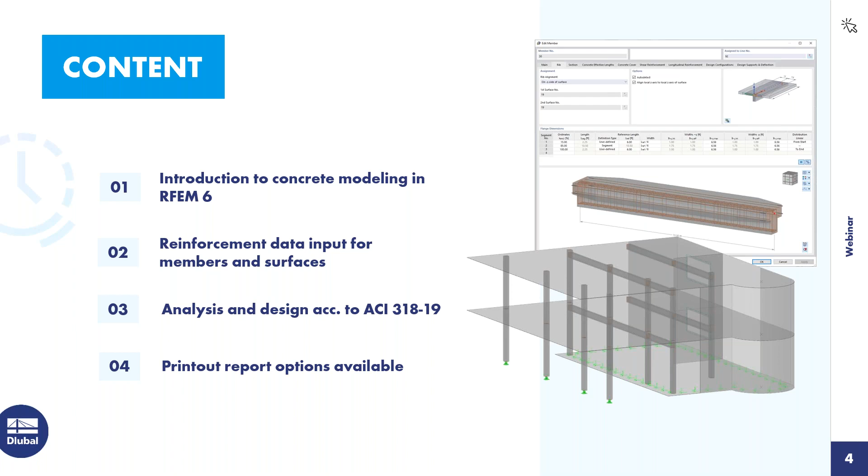As far as the content over the next hour today, we're going to move through a couple of examples, and we'll be working in our new FEA program, RFEM 6, as well as utilizing the concrete design add-on. So I'll give you a quick introduction to concrete modeling within our program. We'll take a look at reinforcement data input for both members and surfaces. We will be running an analysis and of course design according to the ACI 318. And finally, at the end, I'll show you a few printout report options that are available within the new program.

So we'll actually begin immediately within RFEM with our first example. So when we begin a new file, we want to give it a model name. The type of model is set to 3D. On the second tab, you'll notice here are all of our add-ons. So these add-ons would only be available if you've purchased them. And today we'll be focusing on the concrete design. You can see I've activated it here.

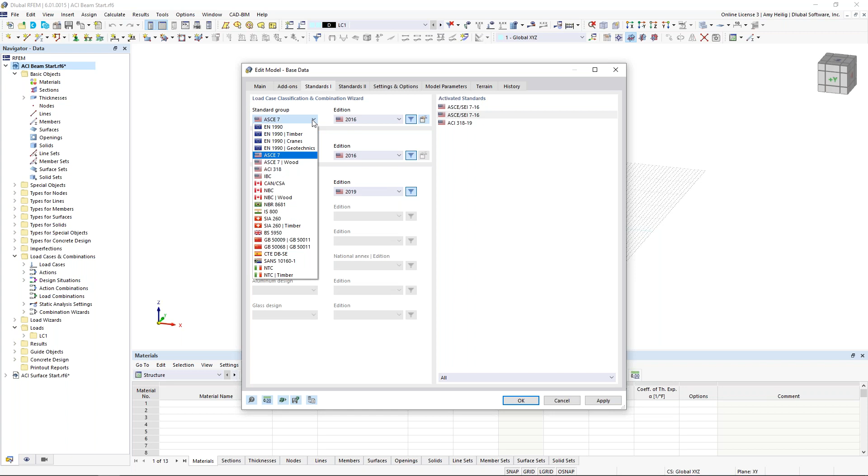Under the third tab, standards, this is where we can select the relevant concrete standard since we've activated that add-on. Today we'll be working with the ACI 318, but you can see here the Canadian standard, the Eurocode, and other international standards are available. As far as our load cases and combinations, we'll be working with the ASCE 7, but of course we can use our drop-down to select a different standard there. And finally, under the settings and options, this is where I can orient my global and local axes. You can see I've set both of these Z axes to upward for the model here.

So once we are done defining this basic information, we are brought into the main program RFEM here. And we want to start off with our drawing grid, which we can right click at the grid down at the bottom to edit this. You can see that I have my grid point spacing set at 1 foot. If you have anything else here, you can either reset it or you can choose this option here, default. That will move it back to 1 foot on spacing.

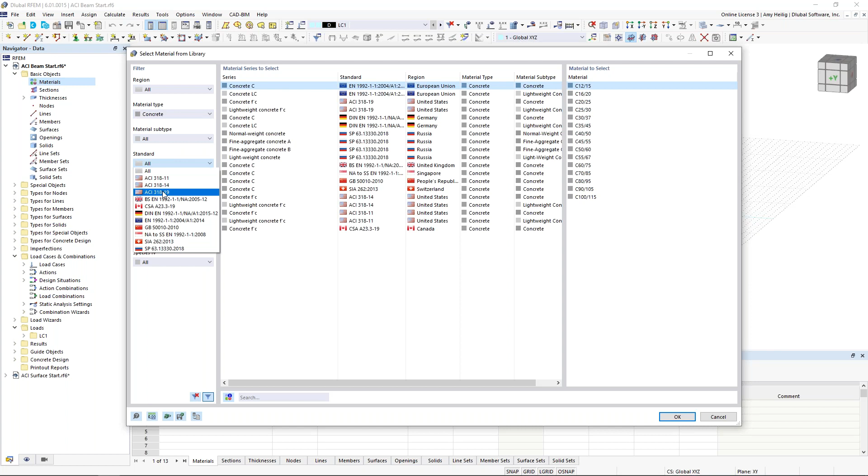We want to begin by defining a new material here. So we will right click within our navigator under the material to create a new material. This will bring open our dialog box within the program. We can then access our material database and we'll take advantage of the filters over here on the left. So you can see within my drop down, I can choose concrete, I can select the standard ACI 318-2019, and from here I can choose my 4000 PSI concrete.

Notice on the second tab here with this concrete material, we also have the settings for creep and shrinkage. This comes into play a little bit later on with the serviceability design for long-term deflection if we wanted to consider that. We'll go ahead and leave this unchecked for our example today.

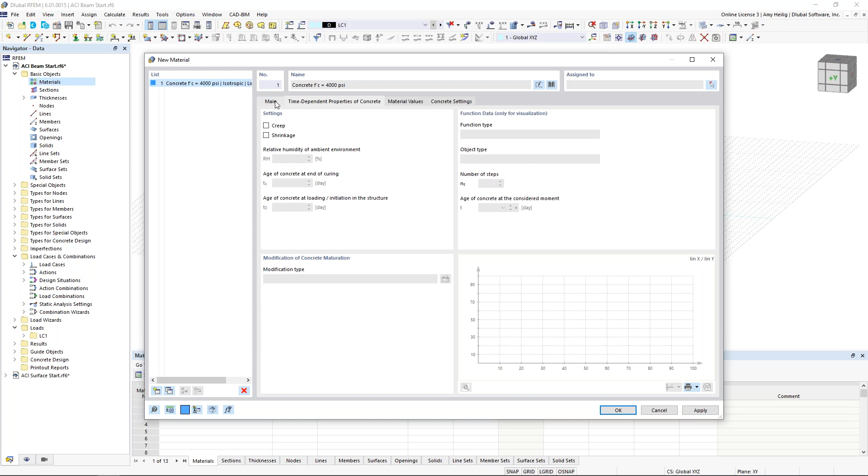Now, while we're still in this dialog box, we want to create a second material. So we once again visit our material database, and over on the left, we use our filters to reinforcing steel. Again, selecting the ACI 318, we can now choose grade 60. So this is a little bit different in RFEM 6 than what we saw previously in RFEM 5, where we do want to go ahead and define that reinforcing material here for our concrete elements. Once those materials are defined, we'll see them over here within the navigator tree. Now we want to do the same thing for our first cross section.

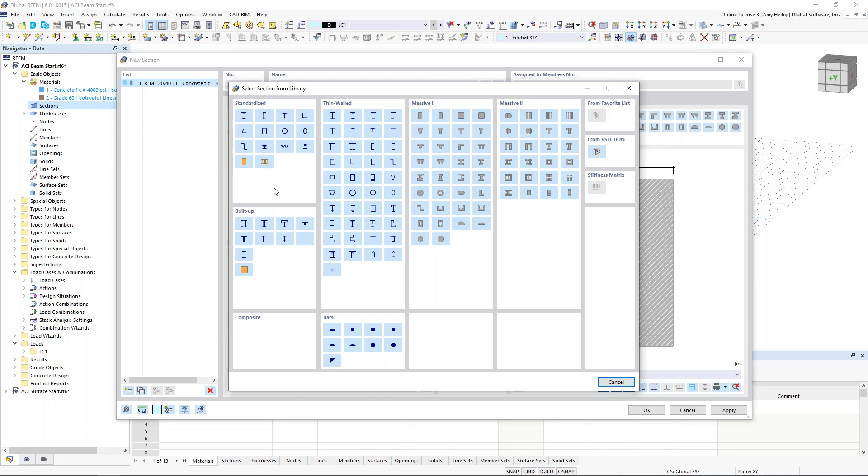So I can right click on the section here, go ahead and choose new section. And we'll see some of the various massive shapes available to us on the right. We can always visit our database here to choose from the library the various thin-walled and massive cross sections. We also have all of the available sections from the steel standards, aluminum, and so on.

But sticking with this basic rectangular section, under the second tab here is where we can go ahead and modify these dimensions at 12 by 18. The third tab will, of course, calculate all of the cross-section properties for us automatically. So we click OK, and now this section is available to us, and we want to begin by drawing our first member. So I can go up here to my toolbar to draw a new single member.

And what you'll see here is the member type is set to beam. Now notice the design properties is automatically checked on here. This is all related to that concrete design add-on that we activated within the base data. When we have this unchecked, notice all of these tabs disappear up here at the top related to our reinforcement. We will only perform an analysis if this option is not checked. But of course, we're also interested in the design portion for our example today, so we'll go ahead and leave this turned on.

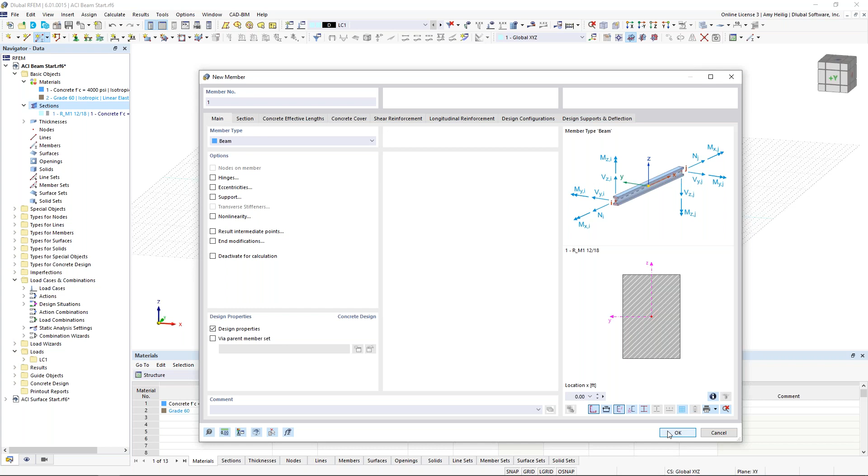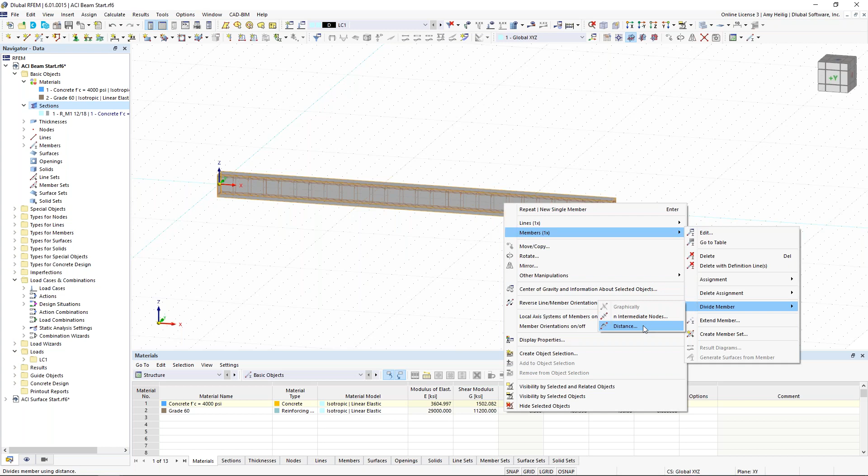We'll get back to some of these various tabs here in just a minute, but starting with the basic geometry here, I'm going to snap from my point 0, 0, 0, and my second point will be at 26, 0, 0. So we have our first beam element shown here. Now I want to add a node along the member length here. So I'll right click on the member, and under members, we have the option here to divide the member by a distance. Within this dialog box, I can tell the program to go ahead and place that intermediate node 20 feet from the member start.

But rather than dividing the member itself, I can choose this option down here to actually create the node without dividing it. So it will remain one continuous segment. I click OK. I can turn this into wireframe view, maybe turn off my grid. I can zoom in here and you'll see this node added along the member length. So let us continue on by supporting this simple beam.

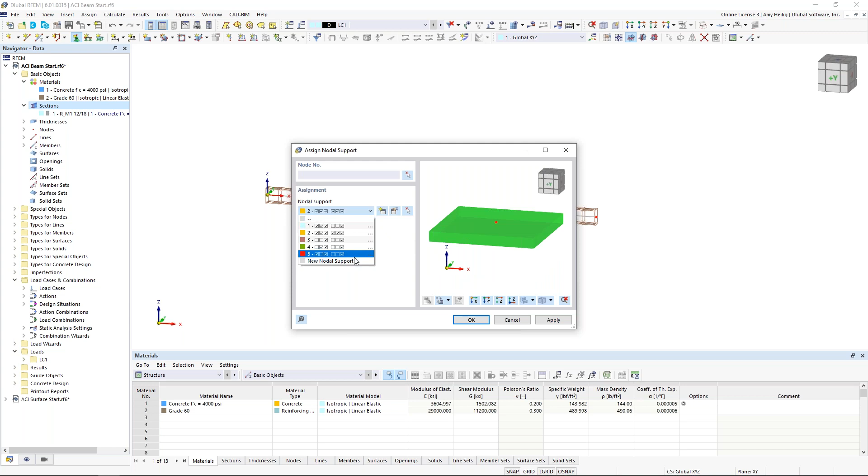So we'll go up to draw a new nodal support. And we have some default options within the program here, such as a typical pin support, maybe a typical rigid. We can also create a new support definition. So within this dialog box, we have our 6 degrees of freedom, 3 in translation, 3 in rotation. Now we also have partial fixity. So if we have something that's not fully fixed, not fully released, we can go ahead and define that spring constant there. And lastly, because RFEM is a nonlinear program, we can define these geometric nonlinearities for the nodal supports within our third drop-down box here.

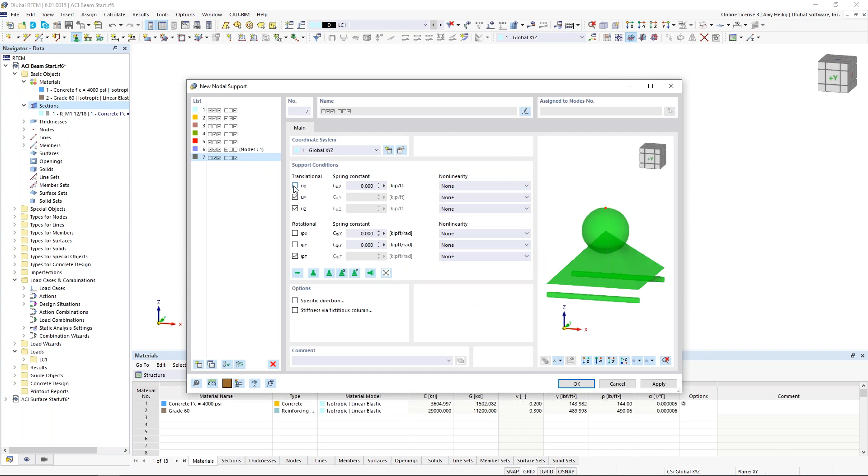For our first nodal support, we want to restrain the rotation about the global x-axis, which I can see back here in the background. I click OK for that first definition type, and then I can graphically select my node here, node number 1. Now notice I'm still within this dialog box. I can click Apply, and I can create a new nodal definition once more. This time we're going to release the translation in the global x direction for a roller. I click OK. I can graphically select my intermediate node here, and I click OK once again, and now our nodal supports are shown here at both these nodes.

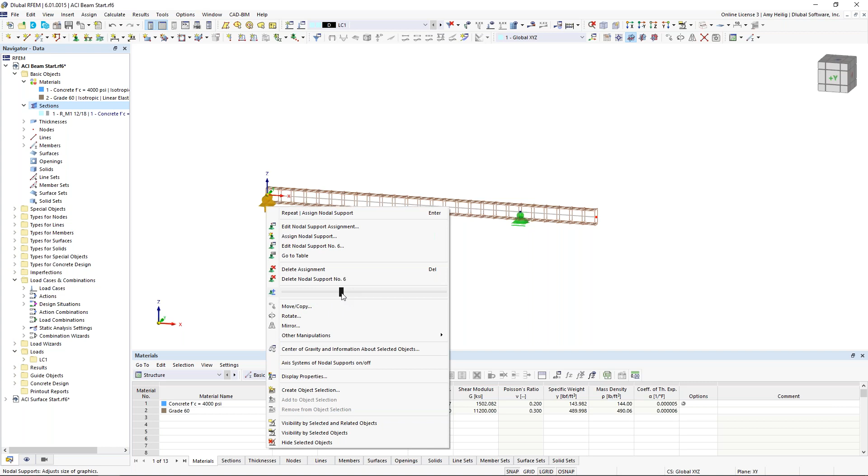Now, something new that we've added within RFEM 6, you can always right-click at one of these nodes and take advantage of this slider option to increase or decrease the size of those nodal supports. Okay, so now that we have the basic geometry defined, let us move on to loading. Now notice the program has already created one default load case here. So if we go into this option, Edit Active Load Case, we can go ahead and rename the load case Dead.

Now the self-weight is automatically activated here. The action category is set according to the ASCE 7 to dead load. So for our second load case, we will create this as live 1. The action category will be set to live. The self-weight will be automatically unchecked here because we don't want to account for it twice.

And finally, for my third load case, I will make a copy and simply rename this one Live 2. So now that all 3 of our load cases are defined, I want to take a step back here.

Under the first tab, Base, we will generate those load combinations automatically according to ASCE 7. Remember, this is what we set under our base data, but we can go ahead and make a change to a different standard here. I also like to activate the option for combination names according to the action category.

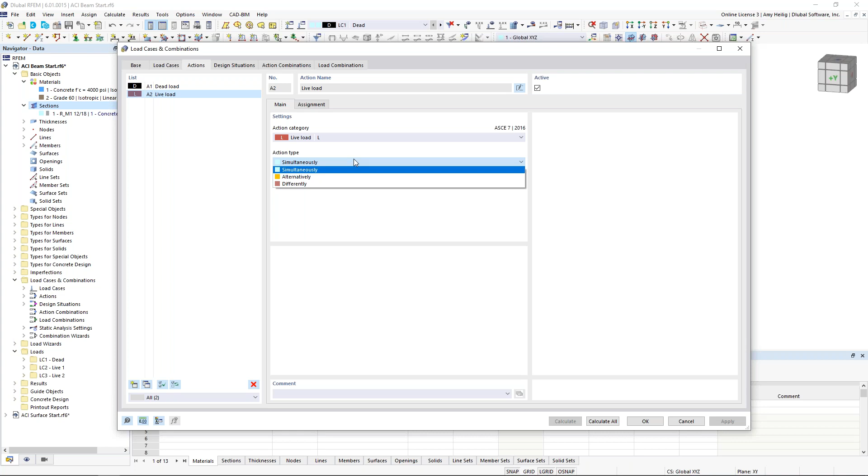Under the actions, we have both dead load and live load defined. Because we have 2 live loads under our load cases, we need to tell the program how to combine these within the load combinations, whether that's together, separately, or alternatively. We can choose those options from the drop-down box here.

Then we have our design situations, and this is new within RFEM 6. We have two design situations created, and these will be used for our concrete design. Notice we have LRFD for our factored load combinations and ASD for our unfactored load combinations. Both of them are active here for the concrete design add-on.

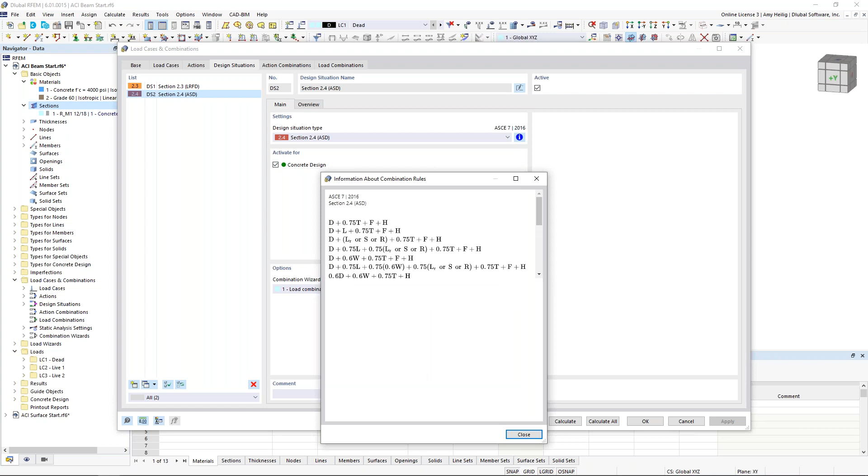Now, if we're curious to see what these load combinations look like, referencing the standard, we can click on this little info button, and now we can see all of the load combinations in detail. But there's something we need to also take care of within this combination wizard that's important for concrete design.

For our factored load combinations, which will eventually be used for our strength limit state design, we know that we need to apply this I-crack factor that comes directly from the standard to reduce the stiffness. And that's all done here within the combination wizard.

So I can go to the edit settings here, and notice the static analysis settings is set to a second order analysis with P-delta considered, which is great - that's exactly what we're going to be utilizing today. But we also want to turn on this option down here to consider the structure modification.

Now I need to create a new structure modification. I'll activate this for members since I only have one member in my simple model. Within my tab that appears here, I need to use the drop-down box to create a new member stiffness modification, and sure enough, within this drop-down box, we see here the ACI 318 Table 6.6.3.1.1A listed.

This is just going to reference the code to give you the I-crack factors for the various component types. And for today, we obviously have a beam, so the I-crack factor of 0.35 will be applied to the bending stiffness here.

So I can click OK here, and then I'm going to want to either type in my member number or I can graphically select it. I click OK, and now for my factored load combinations, the I-crack factor will automatically be considered.

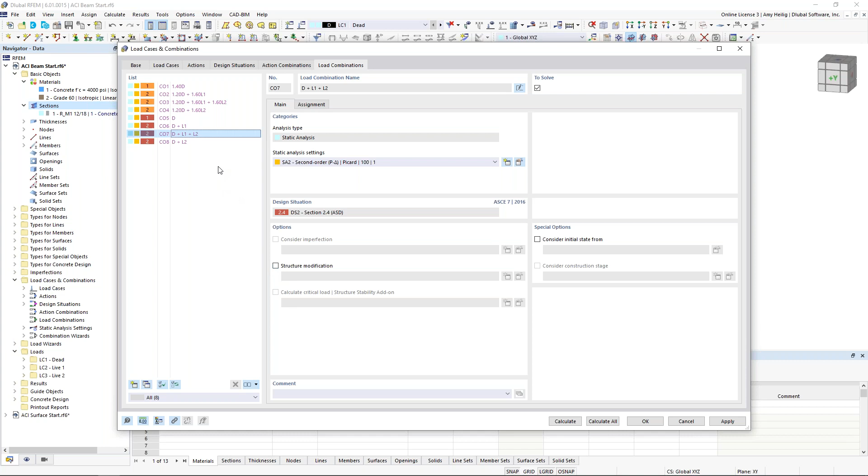So now that we have defined the load cases and combinations, we need to actually apply the load to the member. We'll start off with a new member load within our toolbar here. The program asks us which load case to place this member load under - we'll choose dead load. Up pops our dialog box where we can simply define the load magnitude of negative 1.0 kip per feet.

This load will be applied along the full length of the member. I can graphically choose this member or type in member number 1. I hit apply and next, and notice in the background that load was applied, but I'm still within this dialog box.

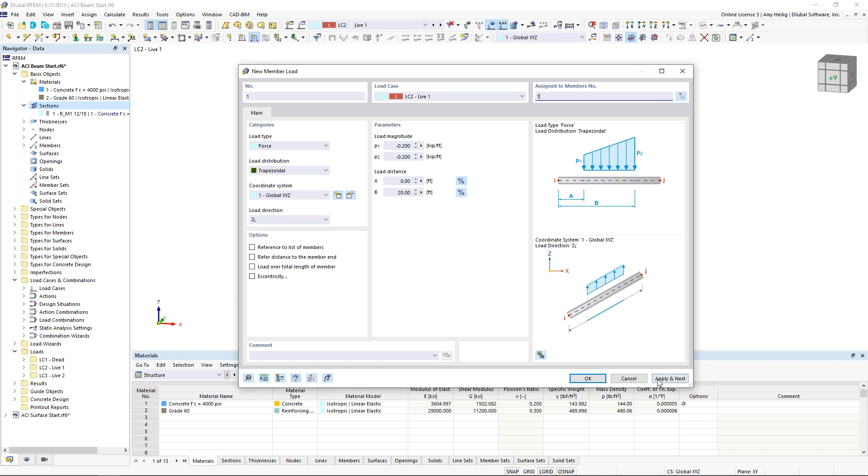This allows me to drop down to load case number 2. I'm going to change the load distribution here to trapezoidal, and adjust my load magnitude at the start to negative 0.2. The end will also be negative 0.2, but I want to make sure to apply this only from point 0 to 20 feet on my beam. I type in member number 1, apply and next, and in the background we should see that live load applied only between our two nodal supports.

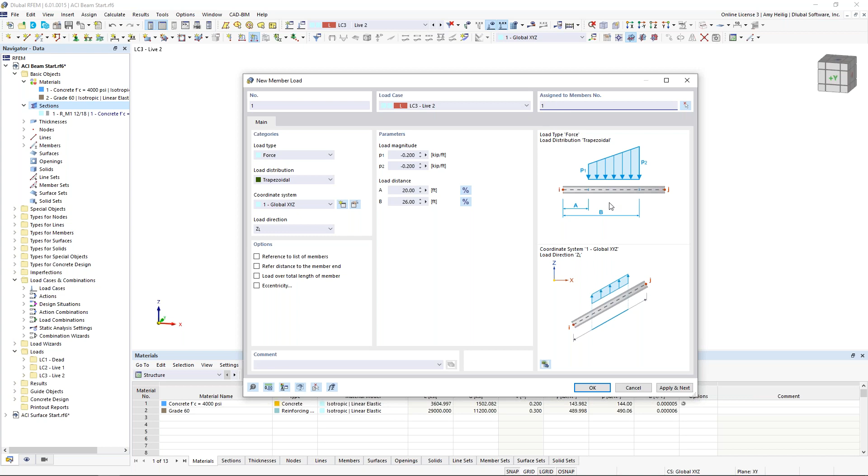We want to do the same thing with load case number 3. We'll leave the load magnitude the same, but adjust this to 20 feet and then to 26 feet. I select member number 1, click OK, and now we should see that additional live load defined here.

Within my drop-down box, I have the ability to cycle through these different load cases and combinations to view the loads applied to my beam, also including the load factors from the ASCE 7.

We can now choose this LRFD design situation and actually run a quick analysis. Remember, I haven't modified my reinforcement yet, so I'm not really doing the design according to the ACI quite yet. The program put in some default reinforcement to begin with.

Looking at just these static analysis results, notice we have a new tab here within our navigator, grayed out because it's the only thing we've solved for, but it says static analysis. We're probably not so interested in the global deformations for these factored load combinations, but what we can take a look at are topics like internal forces.

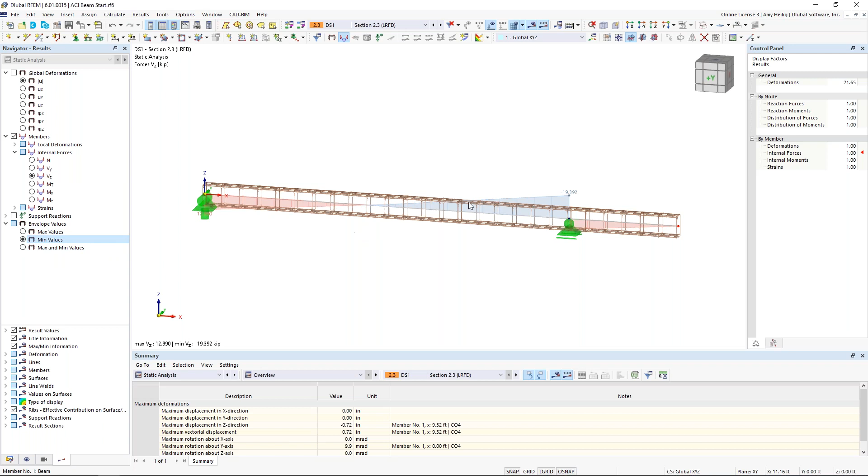You can think of these design situations as an envelope solution. It's going to group together all of those factored load combinations, and you'll see here 2 different values for all of my internal forces. These 2 different values just refer to the envelope values. Currently I'm viewing both the max and min, but I can set this to only the max or only the min, and we'll see that adjust here graphically.

We also can display the support reactions. Again, these are just the internal forces. This is probably what we'd want to use to do our design according to the ACI.

Moving on to that topic, let's double click on this member to explore these other tabs located at the top for our reinforcement definition. The first tab is the concrete effective lengths.

I'm not going to touch anything within this tab. The reason is because when we don't do anything within this tab, it is going to design the member according to a p-delta analysis. That is one of the approved methods within the ACI standard.

Alternatively, if I do define an effective length within this drop-down box, it will design according to the moment magnification method, which is also from Chapter 6, an approved method. But we'll go ahead and design according to p-delta today. So under our concrete cover, we can leave this as 1.5 inches, which is default here.

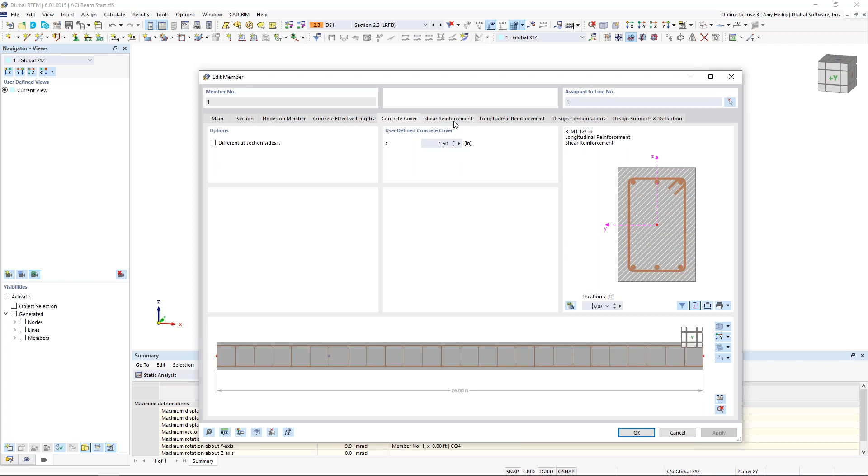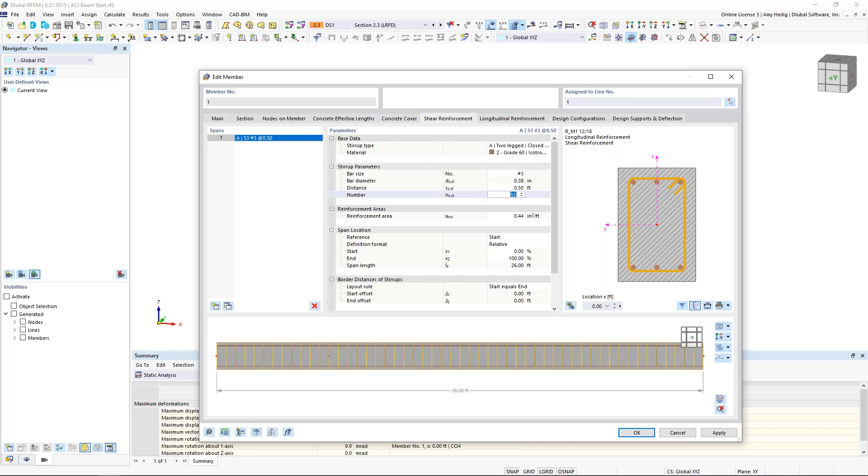Our shear reinforcement allows me to define different zones if I want along the member length. I can create these different zones here and adjust my shear reinforcement as needed. For our example today, we'll just go ahead and utilize these number 3s, but I'm going to modify my spacing to 0.5 feet, or every 6 inches. Notice this picture down here automatically updates with my shear reinforcement, applied along the full member length.

Under my longitudinal reinforcement, this is where I'm going to set the longitudinal reinforcement as shown in this graphic, this cross section. I can use my drop-down box to choose unsymmetrical. This option gives me the ability to define 2 number 5 bars at the top of my beam, and we can see that picture update here. Along the sides, I'd like to define 1 number 4, again seeing those lateral bars update in the picture.

And then finally, we want to update the bottom. We'll go ahead and choose 5 number 5s from my drop-down box here, and we see those 5 number 5s shown within the cross section. So this is going to be applied along the full length of the member here.

What else we can do is define a little bit more information, such as reinforcement offset, but also anchorage type at the start and member end. This is all going to come into play for our development length design checks within the ACI, so we can make adjustments there. For now, I'll just leave this empty.

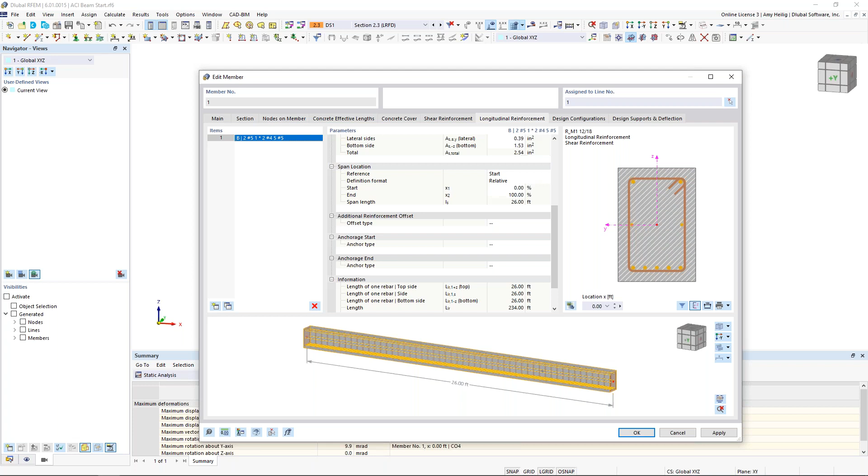Now, we of course have some additional positive bending moment in between these two supports, so perhaps this reinforcement isn't completely adequate, and we'd like to add some additional bottom reinforcement only at this location.

So what we can do here is create a new item. Up at the top, I'm going to choose from my drop-down box the option D line. Then I'm going to choose 4 number 6s. Then I want to adjust my offset distance, which is all measured directly from the stirrup. We can go ahead and modify this at 0 and 1.7. Then for the right-hand side of this line reinforcement, it will be 0 and 1.7 again.

Okay, so now we see that additional reinforcement, but right now it's shown along the entire length of the member. I'm going to actually modify this to begin at 3 feet and end at 17 feet. And now we can see the reinforcement shown here, which will coincide in between the two nodal supports.

Now, similarly, we probably have a negative bending moment over this intermediate support here and into the cantilever portion, so we'd like to add some additional reinforcement for the top of our member. So let us once again define here the option D for line, and we're going to choose here 2 number 5s.

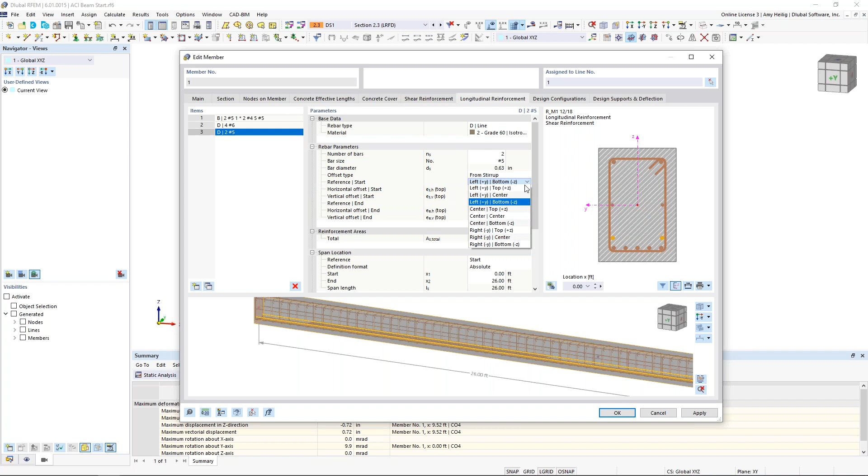Now for this option with our offset distance, we want to use the drop-down box here to choose center, top, positive Z. Then I'm going to modify my offset distance to negative 1.2 and 0. I'm going to choose the same option here, center, top, positive Z, and this is going to be 1.2 and 0. So now we can see that additional reinforcement at the top shown here.

Now we don't want to run this along the entire member length. Rather, we are going to choose a distance here of 17 feet to 25.5. And now we have the additional top reinforcement defined over that intermediate support. So that will be all that's needed for this particular tab.

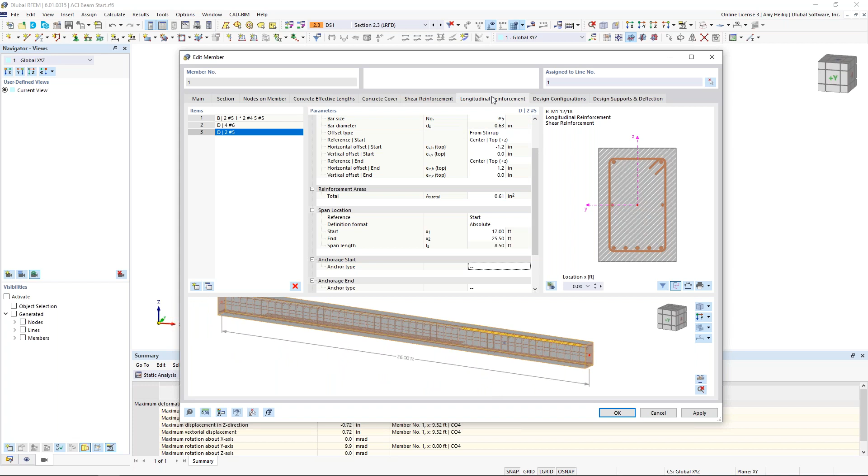So we'll move on to design configuration. We have strength configuration and serviceability, both coming with a default option. We can go ahead and edit the settings for this default. What you're going to see here are just the various options specifically for the ACI on what we can turn on and off for the strength limit state.

So for example, we're going to see here strength reduction factors, some minimums and maximums to consider directly from the standard. Now the stability tab here is related to the moment magnification method. We're not running that for today, so nothing to take care of here.

As far as the serviceability configurations, if we take a look at this, you'll notice initially we're going to be checking the crack analysis. So what this is going to allow us to do is take into consideration section 24.3.2 from the ACI to make sure that our spacing of our longitudinal reinforcement meets the code requirements.

Now additionally, we can turn on the direct crack width calculation. This is a bit more of a theoretical approach; it will utilize the Gergely-Lutz equation to calculate the crack width. We can compare this to the reasonable crack widths set forth by the ACI PRC 224, so directly from that standard we have some different options here that allow us to choose our limiting crack width. For example, dry air protective membrane, we can set this to 0.016 inches. Some minimum longitudinal reinforcement due to shrinkage and temperature.

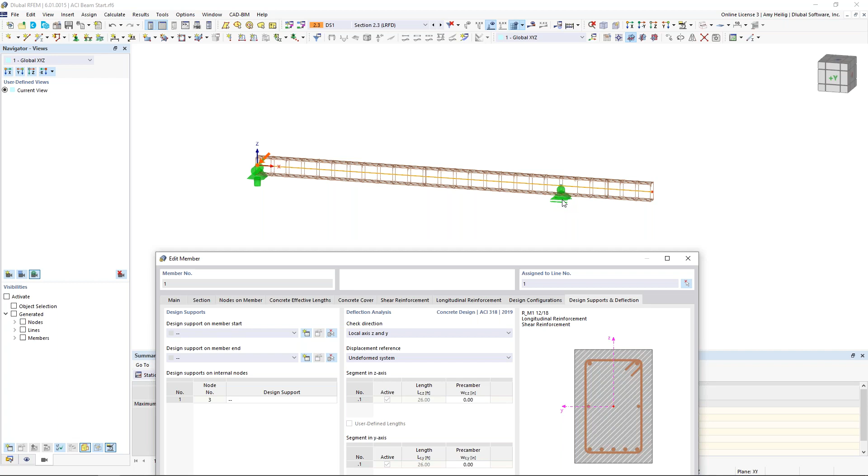Now, the final tab is related to our design supports, and this is important for two different reasons. The first we'll start off with is deflections. So the program doesn't know which portion is supported on both ends, which end is a cantilever. So by defining these design supports, that gives the program the intelligence to recognize which limiting deflection ratio to compare the different segments to here.

And what we'll begin with is a new design support at the left-hand side. So I create this new design support. You'll notice the type is set to concrete. We give it a support width of 16 inches. The support depth is just set to the width of the member. We have a nice picture over here on the right-hand side, just referencing what some of these settings are.

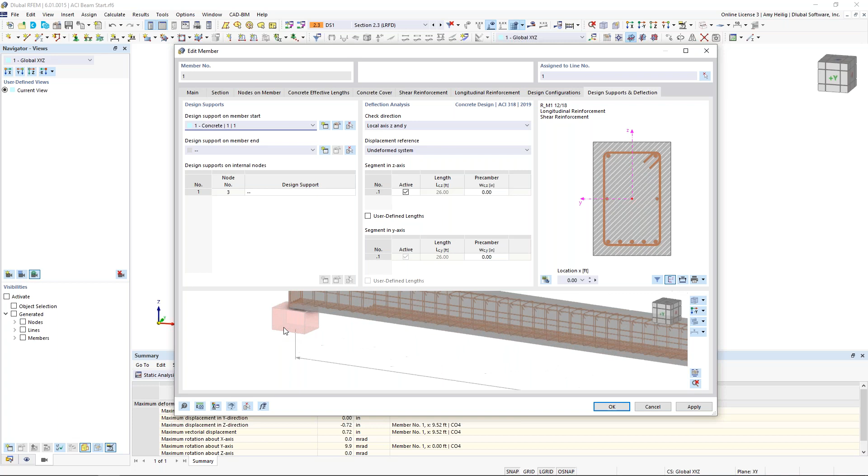Now we also have the ability here to reduce the moment. So we can set this factor for a moment redistribution over this support width. Now this is all related to the ACI section 6.6.5. So when we create that support width, we can automatically see it set here on our first node of our beam.

Now we also want to set that design support on the intermediate node along the member length. So we can do so here at node number 3 by either selecting the support we already defined, or we can create a new definition. This one will also be 16 inches in width, but I want to set my ratio here, maybe 0.75. I click OK, and now we can see that nice design support shown here.

So now the program will have the intelligence to recognize this is a cantilever portion out here on the right, and this portion here is supported on both sides. Now, if you do not set any design supports within this tab at all, the program automatically defaults to a support at the member start and the member end internally.

Now, these design supports are also important for a second reason, and this all comes to do with strength design when we're talking about topics like taking the shear internal force a distance d away from the support face. Well, this will all be considered now with these design supports that we've defined. Otherwise, of course, the program only knows the intelligence of taking the shear force, for example, a distance d away from the member start.

The information over here on the right is just related to the serviceability deflection checks. We can add in a pre-camber. We want to tell the program what is the reference length for our limiting deflection ratios, and that will sum up this particular tab here.

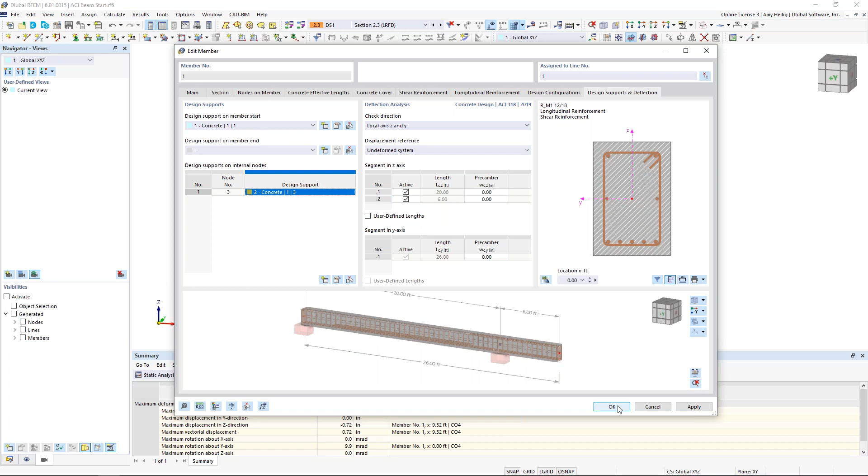Okay, so now that we have finished all of these various settings, notice that the program has automatically updated my reinforcement. We can see those design supports shown here, and we can now move on to the design utilizing the concrete add-on. So within my table down at the bottom, I'm going to activate the concrete design here. So this is available because I have set this under the base data to turn on that concrete design add-on.

Under the first tab, here are my two design situations, LRFD and ASD. We need to tell the program to use the LRFD according to this drop-down box for strength design. Now we want to use the ASD or unfactored load combinations, utilizing this drop-down box for serviceability design.

Now notice we also have an additional option here for seismic design. We could create a new design situation. We could select seismic design as well. Currently, this is only for reinforcement seismic detailing according to Chapter 18. So we're working on establishing some more features there in Chapter 18, but that will be coming in the near future. So for now, just looking at strength and serviceability.

Now the objects to design, we can see here we only have one element in the model, of course. The rest of these tabs are really just repetitive. It tells us our materials, our sections, so nothing to really do here. So we can begin by running our calculation directly within this table.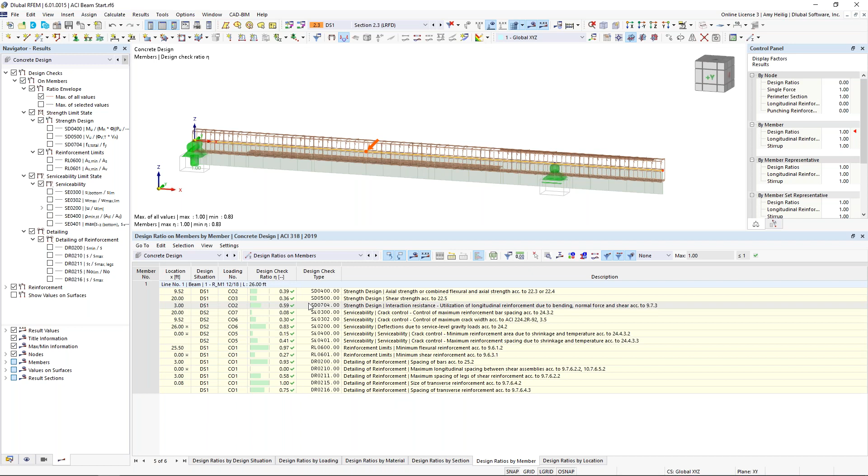All of the design ratios here are green. That's always a good sign rather than seeing red, which means we're over the design ratio of 1.0. We can also utilize these filters up here at the top. If we wanted to view maybe only the max ratio, we can select the max here. Otherwise, all of them will be shown. Now notice as I click through this, the big red arrow showing in this graphical interface here will determine where my controlling internal force is.

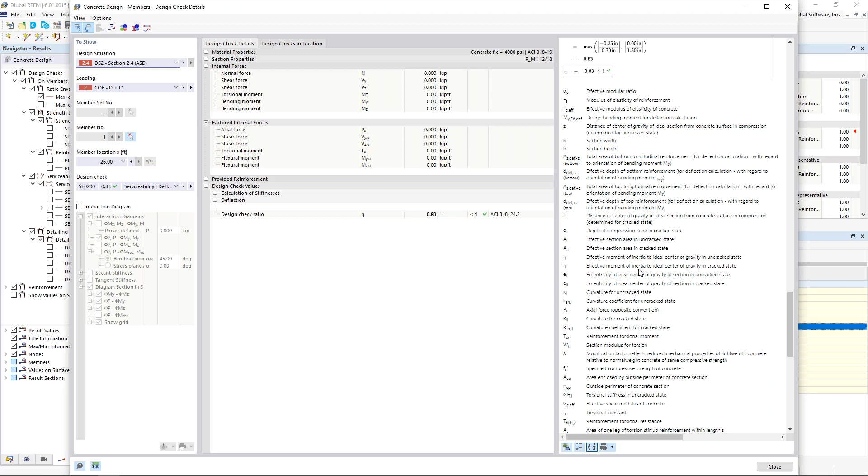The other new thing within RFEM 6, for any one of these design ratio checks, what I can do here is to visit my design check details. So this is going to launch this dialog box that is going to show all of my code equations here. So notice this one is pretty long and complex, but we show every single equation. Down at the bottom, we're going to give you every variable definition. We're also giving you all of the code references along the side as well.

So we can use any one of these checks here. Currently, we're looking at serviceability. We can take a look at any one of these other checks to determine the ratio here for our other various serviceability checks. Now, alternatively, we can take a look at any one of the strength design checks as well. Same concept. We're going to see all of those variables listed again with all of the code references.

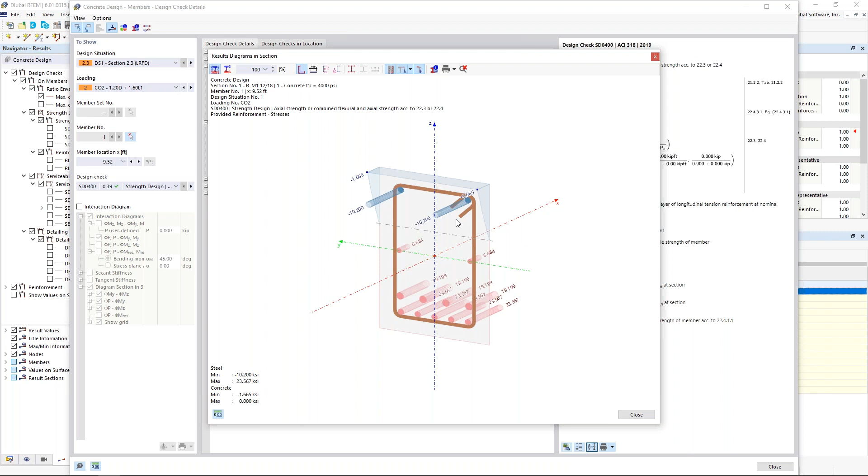What else is pretty powerful is we can view the diagram in section. And this is showing me which portions of this concrete section here are in compression, which are in tension, and we're also giving you the stresses for each of the rebar here. So this information is all available to us, of course, in our table format, but now we have this new drop-down here for concrete design. And we can see if we collapse these trees that we have two options here, the design checks or the reinforcement. So let us take a look at the design checks first.

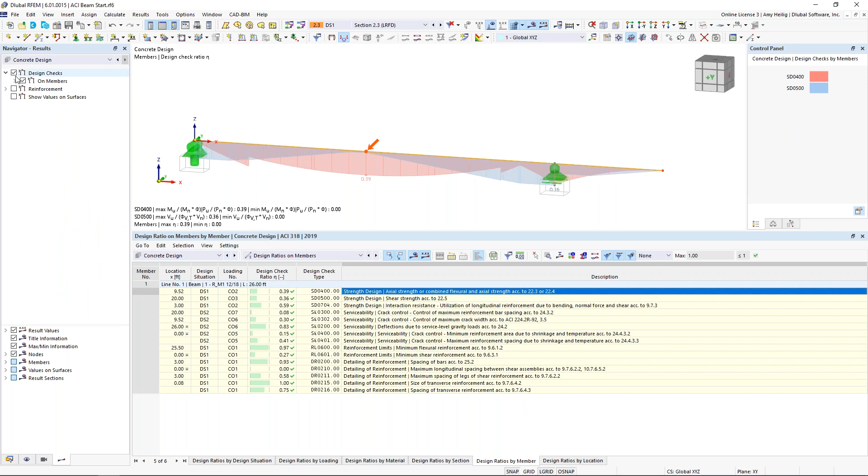Also, I can turn off my reinforcement on my member by visiting my navigator display options. And here we'll see types for concrete design, and I can turn off my member reinforcement. So going back to my member design check results here, I can turn off maybe the max ratio and turn on any of the various checks related to my color coding here, which all relate back to the table design ratios.

Now, in addition to viewing the design checks, we also can take a look at the reinforcement along the member. And what I mean by this is we can view the required reinforcement at the bottom of the member. This is strictly from the analysis. Well, on top of this, what we can do is to overlay the provided reinforcement on the bottom. So what we would always hope to see, of course, is that the provided reinforcement is greater than the required reinforcement.

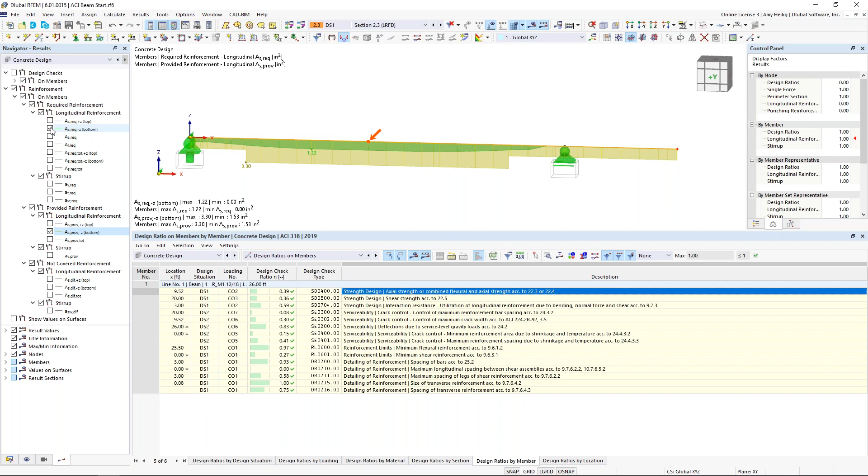And in a similar fashion, we can turn on the required reinforcement for the top, which makes sense. We see it over here along the support and into the cantilever. What we can do is to overlay the provided reinforcement at the top. And again, this is greater than the required. So some various options there in terms of how to graphically view these concrete design results, both in table format as well as within the graphical options.

So that will go ahead and wrap up our first example here. I wanted to give you an introduction to just a simple beam design. For our second example, let us move into a little bit more of a complex structure. So now we have an entire building here. We have columns, beams, walls, and slabs all defined with reinforced concrete. Now, the first thing here is I've already set up the load combinations, taking care of a lot of this information that we just did with example 1. Let us go into our design situations that we already covered.

So again, we have LRFD and ASD, and as we mentioned before, we need to set those I crack factors for our factored load combinations for the strength design. Well, I went ahead and did so. I just want to show you guys how this differs a little bit when looking at the structure modification here.

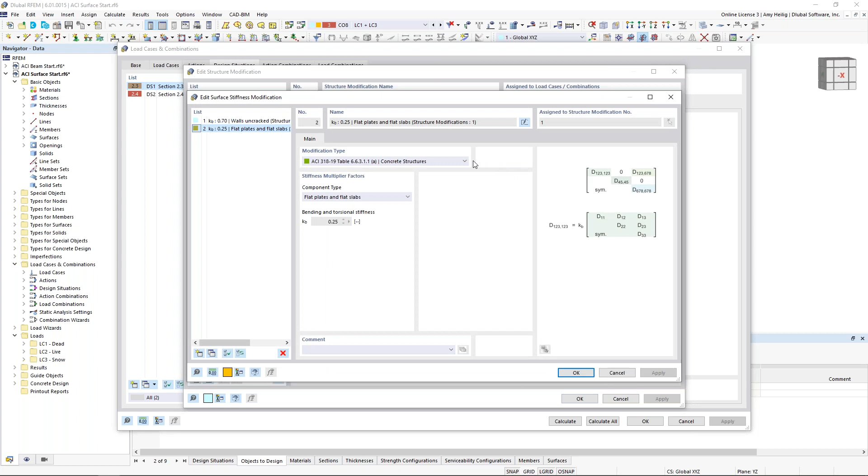Now you'll notice I've activated both members and surfaces. We have two tabs up at the top, and I have set the I crack factor for my columns. I've selected all of the column members here. I also see my beams, and I've selected all my beam members. And under my surfaces, we have set the I crack factor according to the ACI for walls uncracked and flat plates and flat slabs.

Now, just to go into these detail settings, I also wanted to mention that in a similar manner, we have the Canadian standard here. It's the same concept for designing according to the CSA standard, so that option is also available here.

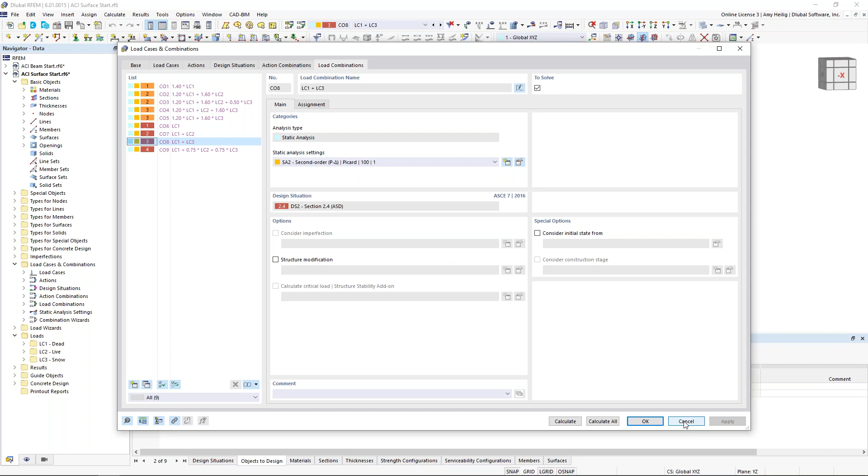Okay, so now that we have defined these structure modifications for our factored load combinations, I created an additional combination wizard for my unfactored load combinations, which should not have any stiffness reductions. So we'll see that reflected here within our load combinations, just like what we saw with example 1, but now we have many more elements.

So let us begin with the reinforcement definition for our first surface. And we'll choose this slab located here in the center. And I will go ahead and create a visibility by the selected objects. I'm also going to right-click on this surface, and I'm going to turn on the local axis system. Turn this to wireframe view as well. The local axes are important for the reinforcement directions, which we'll see in just a minute. So I wanted to go ahead and set us up for that.

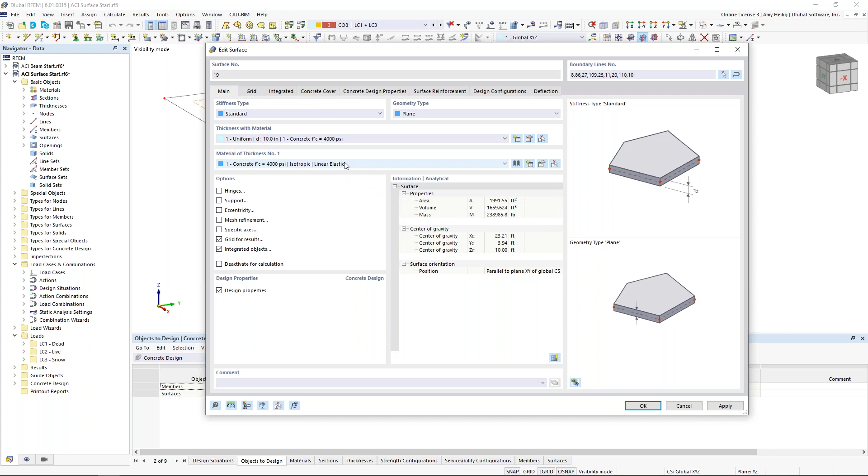So all we need to do is to double click on the surface here. Now, just like with the members, with the design properties turned off, which is the case with every single element within this model right now, we're only running the analysis. But when I activate the design properties, we see all of our additional tabs here where we can define our reinforcement for the design. So let us move to the concrete cover. And we'll begin by defining a new concrete cover of 0.75, just referencing table 20.5.1.3.1 from the ACI. Sorry about that.

Okay, now the concrete design properties. This is going to be where we set our reinforcement direction. And we have no reinforcement direction defined right now, so let's create a new one. The reinforcement direction is going to be related either to the local x-axis or the local y-axis of the surface. So this is why I wanted to turn on the local axis so you can understand how the reinforcement direction is influenced by this.

We'll begin with the local direction x for the top side as well as the bottom side. So if I bring this down again, we're utilizing the direction based on the local x-axis, and the transverse direction would be the local y-axis. Now, of course, you can rotate this too. It doesn't necessarily have to be in either one of those orthogonal directions.

For the surface reinforcement, we create a new definition here. And we're going to apply the reinforcement over the entire surface. My reinforcement material is already set at grade 60. The reinforcement type can be welded wire mesh. We have the library in there. It can be rebars or it can be stirrups. So perhaps we want to define some additional shear reinforcement around our columns, for example.

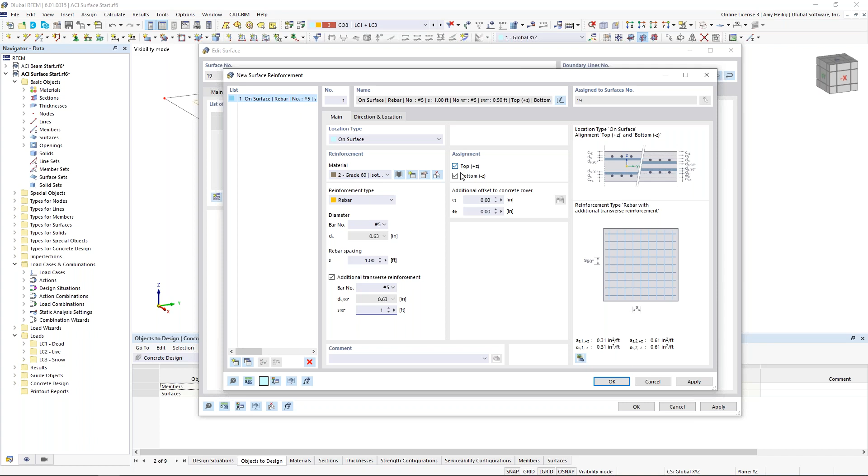But we'll go ahead and utilize the rebar option, and we will choose number 5s at 12 inches on center or 1 foot. Now, we also want to apply this in the transverse reinforcement direction. So notice right now it's only spanning one way. When we activate this, we want to choose number 5s, spanning 1 foot in the orthogonal direction here. So we see the picture update over here on the right. Now, we're applying this to both the top and bottom of the surface. So I've created this first definition type here. We can see it populate here within our table.

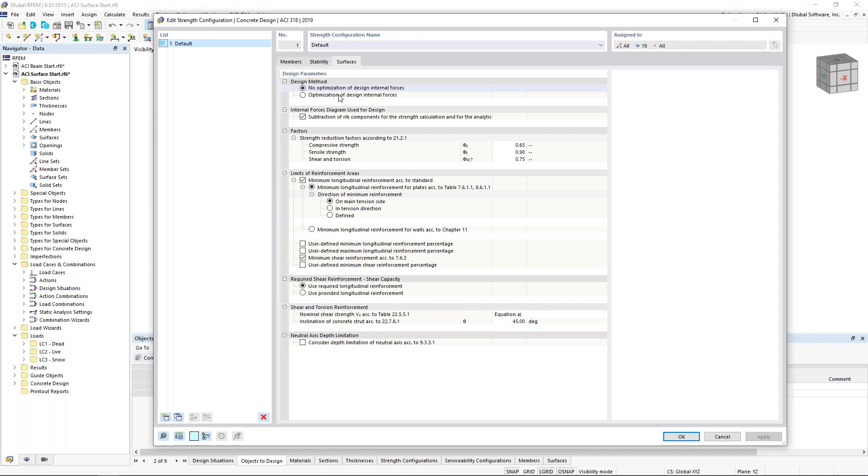Okay, so the design configurations, really same concept here of what we just talked about with our first example. Just notice that we now have an additional tab here for surfaces. So just some various settings specific to the ACI for our strength limit state design. Serviceability, same concept we've already discussed within the previous example, but just know that we can check deflections for surfaces as well.

So that limiting deflection ratio is still referenced here within this design configuration. Under the last tab, deflection, this is where we simply tell the program, is this surface supported on both ends or is it a cantilever? The reference length is determined by this dropdown where we can use the maximum boundary line of the surface, the minimum boundary line, or we can manually set that length as well.

So now that we have defined our surface reinforcement here, we can click OK, and we see this graphically update here with our number 5s at 12 inches on center. But if I go ahead and right click and show the hidden objects in the background, we know that we have these columns framing up into the slab here. So we're probably going to have some additional negative moment at these locations. So perhaps I'd like to add some additional top reinforcement, but only at these locations. We don't want to apply it to the entire surface.

So if we take a look back at our navigator here, we see the types for concrete design. And here's our surface reinforcement. That surface reinforcement number 5s at 12 inches on center is defined within this tree option. Well, I can right click to create a new surface reinforcement, and this dialog box should look familiar, but this time we're going to choose the option free rectangular. So here we can define additional rebar, and I'm going to choose again number 5s at 1 foot on center. And I'm going to also define the transverse reinforcement, number 5s at 1 foot on center. I only want to apply this to the top of the surface, not the bottom.

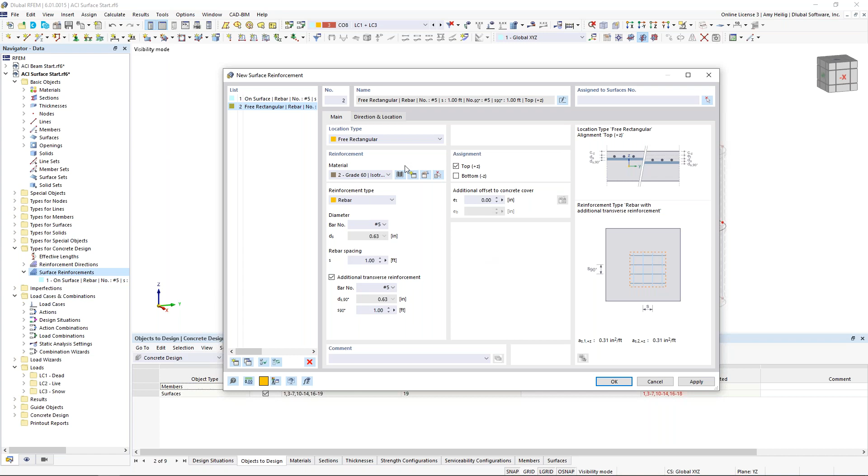The direction and location tab, I'm going to choose the option center and sides of rectangle. This allows me to graphically choose my point here, and I'll choose the top of one of these columns, 18 and -11. I define the size of my rectangle, 6 feet by 6 feet. And then I can graphically choose my surface here I'd like to apply it to.

Now, this picture represents the fact that we can actually project down this reinforcement over multiple levels. So if we have a multi-level story concrete structure, and we know that this same free surface reinforcement should be applied at every single level, we can define multiple surfaces here, and the program will automatically place that at every story level. Okay, so once we click OK, we should see that additional reinforcement here.

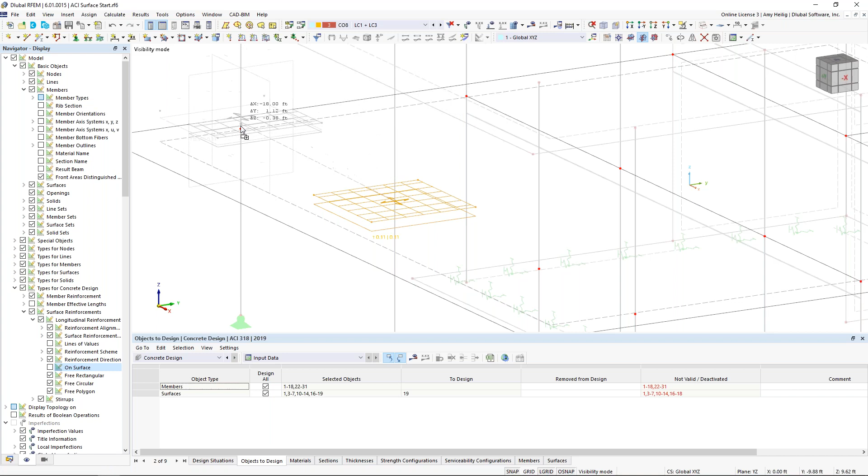Now, it might make a little bit more clear under our display navigator. I am going to turn off the surface reinforcement here on the surface itself, so we only see this rectangular surface defined here. Additionally, what I can do is to select this, hold down my control key, and actually just drag and drop it to different locations on my model that I know I'm going to have a little bit higher of a negative bending moment. I also have some areas back here where we kind of intersect with the walls and columns that need a little bit more reinforcement on the top.

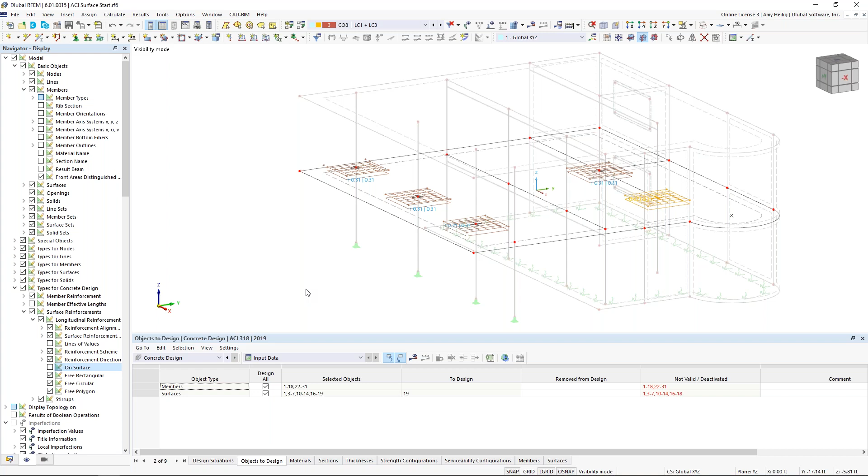So of course, we'd want to continue optimizing this best we can based on the internal forces. Again, we probably want to add some shear reinforcement and such to the slab. Now, just taking you to another little side note here, punching shear, this will be ready actually, hopefully in several weeks for the ACI. It wasn't quite ready for this presentation, so we're not checking that right now, but that should be very close to being done within the program.

So once we have defined our surface reinforcement, we can actually begin the design. But before we do, I'd like to define a little bit more reinforcement for some of these other elements within the structure. So let me turn off the free rectangular, and I will turn off the local axes of the surfaces, and I'll cancel this visibility mode and turn this back into the rendered building here. So notice we have these beam elements drop below the bottom of these slabs. Well, these are special members. If we double click on them, the member type is set to rib.

So what a rib element allows us to do is to actually design this as a T-beam, so integrating it into the slab directly. So what we do is define the rib alignment here on the -Z side of the surface. Now, what's new within RFEM 6 is that we allow you to vary the effective width or the flange dimensions along the length of the member.

So currently the default is just L/6 over the full length of the member. But what we can do here is to change this to maybe 85%, and we'll modify this to the segment, and we will set this to L/8 instead. Now from 85 to 100%, I'm going to use my definition type here to user define. We will set this to 6 feet, and we will go ahead and select L/8 once again. So notice that the effective width transitions clearly here at 85% to a smaller value.

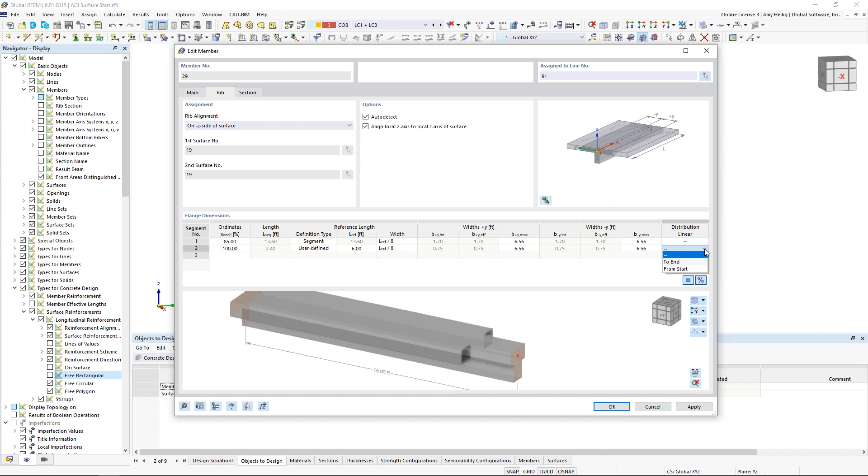Now, what else is new is that we have this option within the distribution linear column down here at the end to linearly distribute this to the end. So notice at 85% to 100%, we have a clear line transitioning back to the end of the member. So this is all done as we approach the interior column here. So that effective width is set for that rib member.

Now I went ahead and did it for the rest of these members. You'll notice here for this particular rib section, if we zoom in, we have this linear distribution at both ends as it spans between these interior columns. Maybe up at the top though, we want to also utilize these rib options, but for these, what I went ahead and did is just set these without using that distribution option down at the end. So we have a clear, distinct view here of where the effective width changes at 85%. So either are possible within the program.

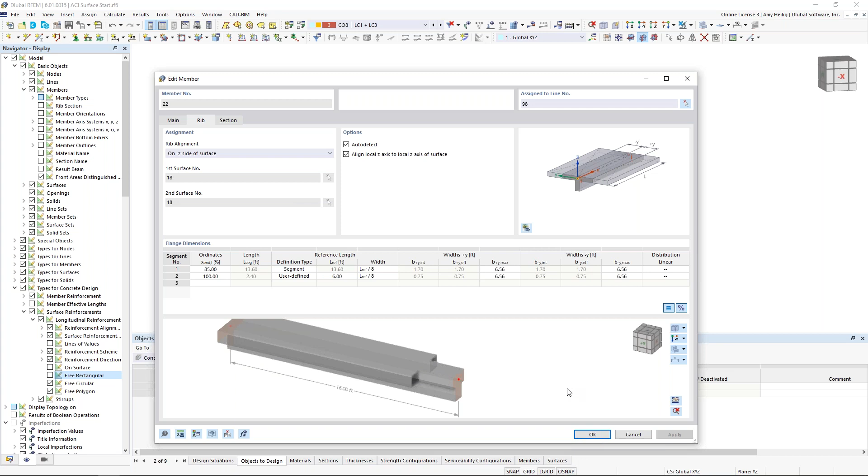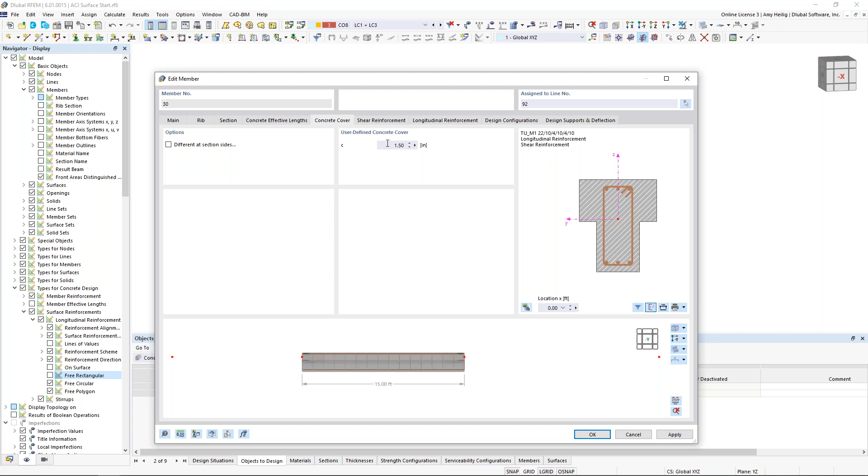So let us begin by designing this rib member here in the center of that lower level. Now remember, everything has been turned off for the design property, so we want to activate that now. And we are going to take a look at the concrete cover. Remember the effective lengths we leave empty. We're not designing according to the moment magnification method, but rather P-delta. The concrete cover, we will leave this as default at 1.5 inches.

Now for my shear reinforcement, I actually do want to have 3 different zones here. So I can zoom in, and for my first zone of my shear reinforcement, we want to choose number 3s, but we'll go ahead and have a tighter spacing here of 4 inches or 0.33 feet. Now I want to modify the distance here of this zone so that this is applied from 0 to 3 feet. And now we can see our picture update down here at the bottom.

My second zone is going to be number 3s, and we're going to modify this spacing at 0.5 feet or 6 inches. This will be applied from 3 feet to 12 feet. And finally, for our last zone, we want number 3s at 0.33 feet. So that will be that 4 inches there. And this will be applied from 12 to 15 feet. Again, everything is updated within this picture.

For the longitudinal reinforcement, notice we have some grayed out options here. So what does this refer to? Well, if I take a look along the length of the member, we can actually consider automatically the surface reinforcement. Remember those number 5s at 12 inches on center that we defined? You can see them displayed here in the effective widths or the flanges. Well, we can also turn this off and manually apply reinforcement as well, which is what we'll be doing today. So we'll begin first with the basic longitudinal reinforcement here within the main member.

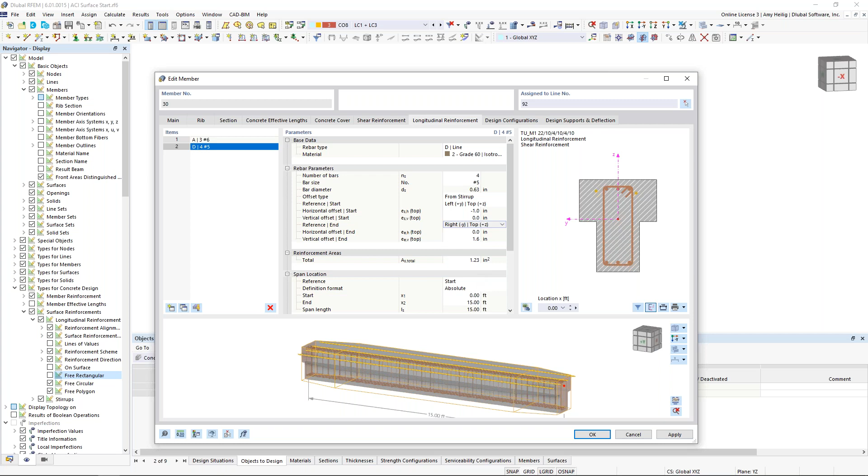This should be right on +Y, which we see here, but top negative Z. We want to go ahead and modify this one to a distance of 1 and 0. If we expand here on the distance to get a larger effective width for our flanges, this will make more sense as we see our reinforcement on top. We'll have to play around with this to get those offsets correct with the display options. This will also be applied along the full length of the member here.

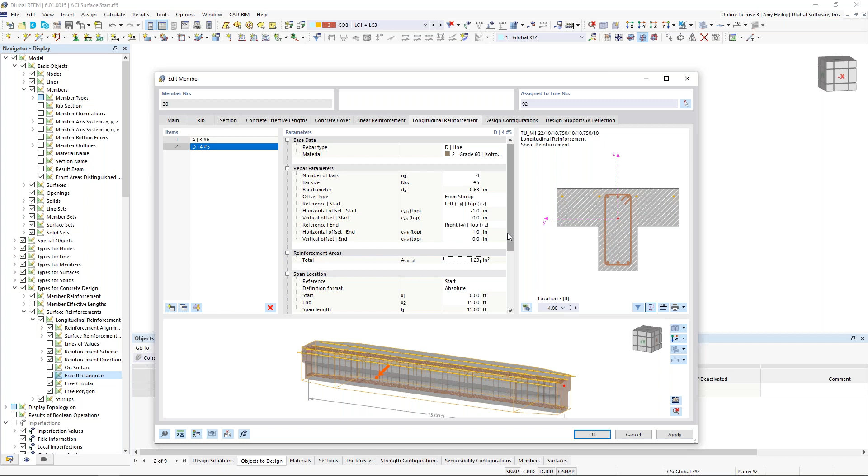Okay, so design configurations, we've already covered. The design supports - again, if we do nothing within this particular tab, the program will just treat it as supported at both the member start and the member end. Perhaps we'd want to take into consideration the fact that this rib is framing into the column, so we'd want to set those design supports here, but for our example today, we'll go ahead and leave that empty.

Now we should see the reinforcement drawn graphically here within the model.

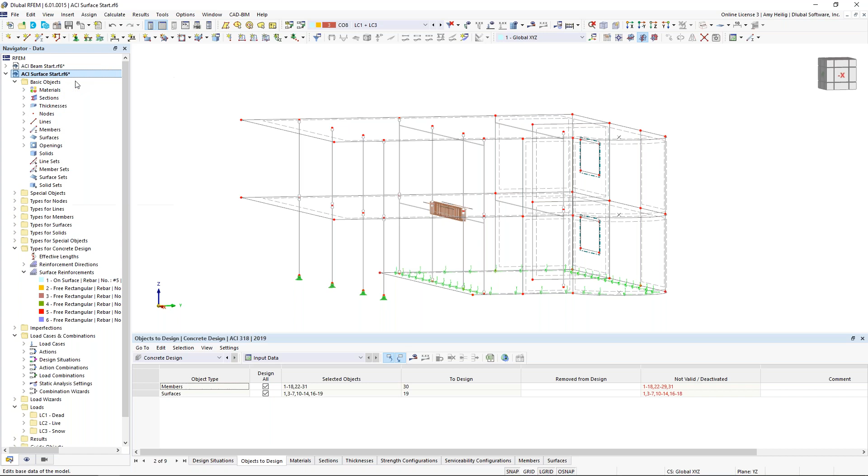Okay, the final thing to do is to set the reinforcement for some of the columns. For this, I want to go back to my navigator here, and I'm going to right click to visit that base data. So if you remember when we began our example, we can revisit this dialog box here. Under these settings and options, I can activate what's called member representatives. Up pops a new tab up here at the top, and what the program has the ability to do is to group together members based on similar materials, sections, lengths, and so on.

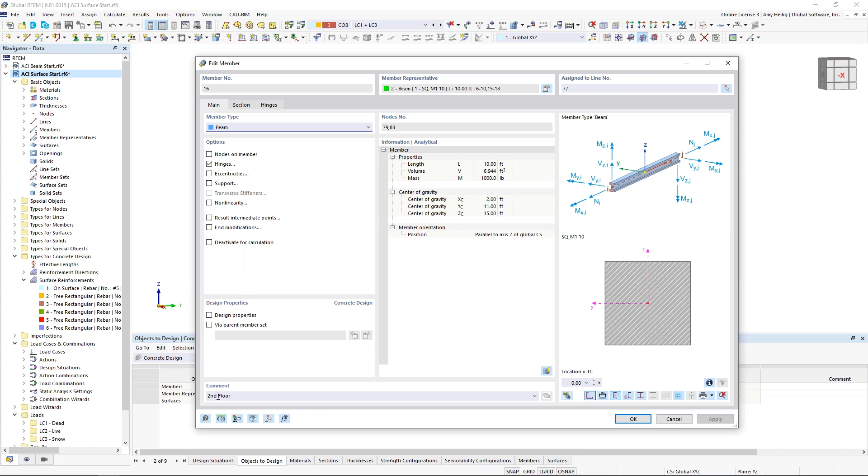I've also activated comments here. So what we'll see when we click OK is a general color coding of all of those elements grouped together that have those similarities. Now, the columns at the first floor are actually identical to the columns at the second floor. So how I differentiated them is by simply typing in this comment down here at the bottom for those members, second floor, and then automatically the program will place them into a different member representative group. We can see this denoted by this green color.

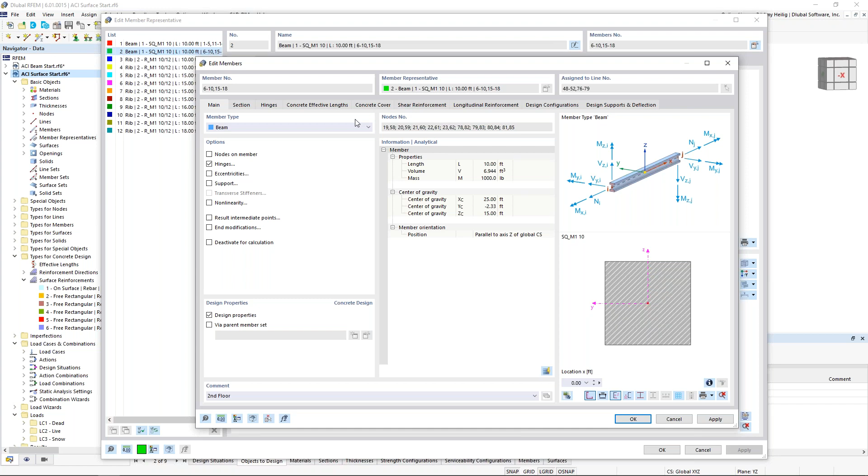So what I can do is double click on the green color itself, and up pops all of our member representatives. We'd like to define the reinforcement for the columns. Currently members are listed here, and I'm going to go into the edit settings. I have the design properties turned off, so we're going to turn those on. Now, I'm not going to define the reinforcement here because if I do so, I'm actually defining that individually for each member. Rather, when I click OK, you'll notice that I'm still within the member representatives, but now I have the exact same tabs available to me here.

Why this is beneficial - if I go into my member representatives and make a quick change to the reinforcement, that's going to update all of my members that are grouped together. So once again, we will visit the concrete cover, 1.5 inches, the shear reinforcement. We want to modify this here. We'll just go ahead and change the spacing to every 6 inches, 0.5 feet. We see our picture update here.

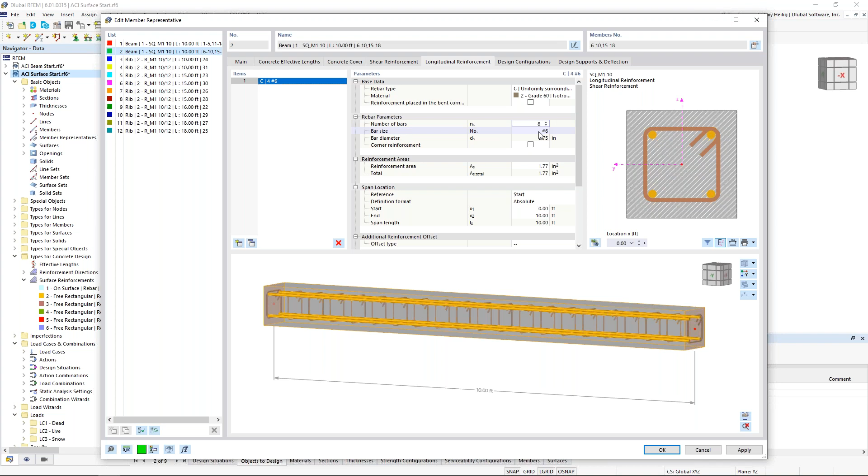The longitudinal reinforcement, we're going to use our drop-down box to choose uniformly surrounding, and we're going to choose 8, number 6 bars. We can see again the picture updates accordingly. These are applied to the full length of the member. I click OK, and what we should see now is all of our reinforcement for every one of those columns at our second floor.

So now that we have defined the reinforcement for the surface, for this rib element, and for the columns, let us move into running the calculation for both the analysis and the design. Remember, we want to utilize this drop-down box here to visit our concrete design add-on for the input data. LRFD, our factored load combinations, are going to be set according to the strength design. Our unfactored ASD load combinations are set according to the serviceability design.

The objects to design - well, we have a lot of red elements here, and that is simply because we have not defined the design properties. I didn't turn on that checkbox, I didn't set the reinforcement. So therefore, we're going to get errors if we try and design everything within the model. So rather, let us turn off these checkboxes here, and I'm going to graphically select surface number 19, and then I'm also going to graphically select my rib element here.

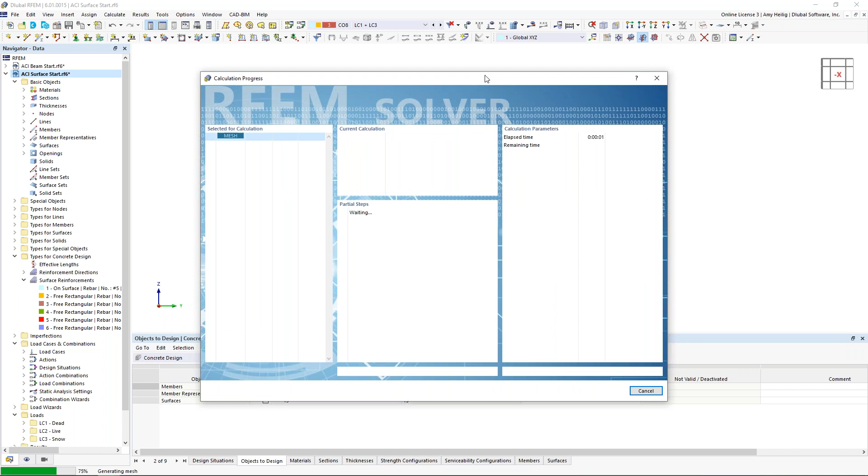And I can also utilize my selection box here to choose all of my columns at the second floor, and I click OK. So now only the relevant members and surfaces will be designed here. The rest of these tabs down at the bottom, we discussed that is just a little bit of repetitive information, nothing to do further, and we will begin the calculation.

So new within RFEM is utilizing the multi-core processor within your computer. Notice that these load combinations, both the factored and the unfactored, are going to solve at the same time, even for these larger models such as this building. Previously in RFEM 5, we had one solve after the other. So these are all complete.

Now notice under the concrete, we have to solve again all of the unfactored load combinations. And the reason for this is, remember, we talked about the effective moment of inertia, I sub E, and that is related to the ACI table 24.2.3.5. The program automatically calculates that stiffness reduction to be considered for the serviceability deflection checks. So that's why we're seeing those load combinations listed again here.

Now, the final progress bar is just going to be showing us how all of this information is compiled into the table format as well as the graphical format here. So this should solve in just a couple more seconds, and we will be back in RFEM with the results.

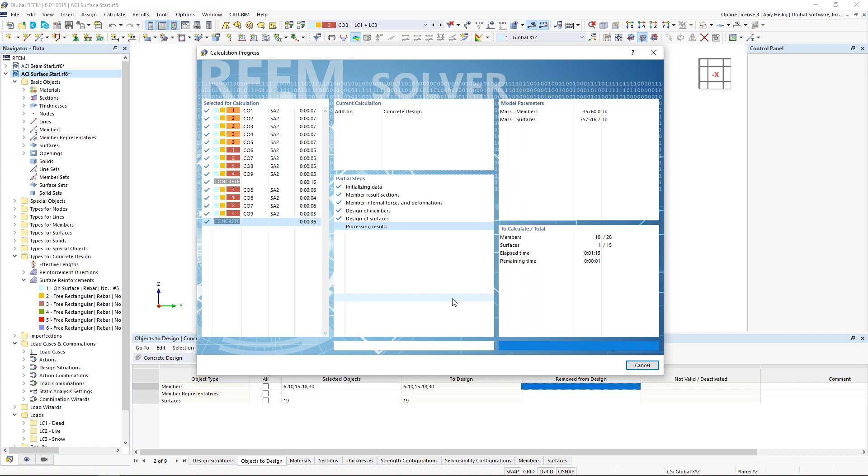Okay, so now that this is complete, what you'll notice here is we are viewing the overview from the concrete design. So any errors, any ratios that are greater than 1, we would see that listed here. So let us jump down to the design ratios on the surface.

And it actually doesn't look too bad. Everything looks green except for, of course, the shear resistance. Inevitably, which I can go ahead and show this to you guys here, the reinforcement on the members is just simply needed for these areas where we have the column intersecting with the slab and at some points where the wall is intersecting as well. So what we'll see listed here otherwise is the design ratios for strength, again, reinforcement limits and serviceability.

Now, for these checks, we can visit the design check details, and similar to what we saw with our member design, it's a similar concept for the surfaces. This one you can see is rather complex, but all of the code references, the equations are listed here. We can also utilize this drop-down box if we want to jump to one of the other design checks here. This one's a little bit more simple, again with the code references given to us on the right-hand side. So very similar, again, to what we saw before with our members.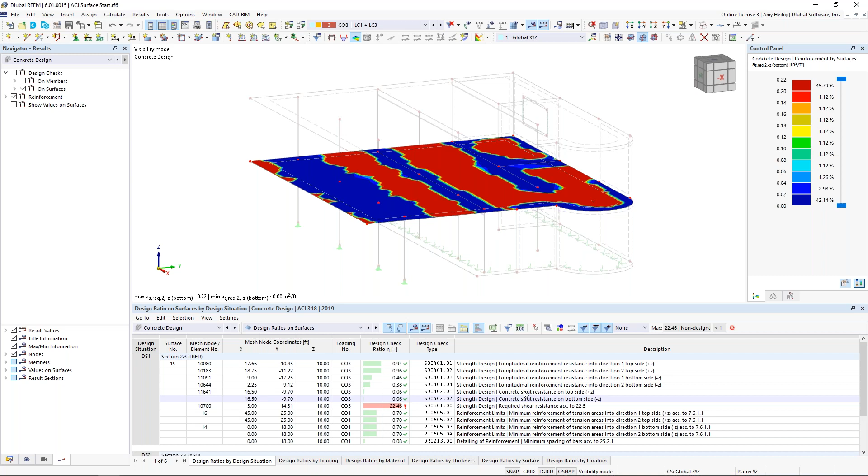Similarly with the members, we have the results available to us in the table format. So let me cancel my visibility mode here. And let us move to our drop-down that shows us the design ratios on the members. So currently we're viewing this tab, design ratios by member.

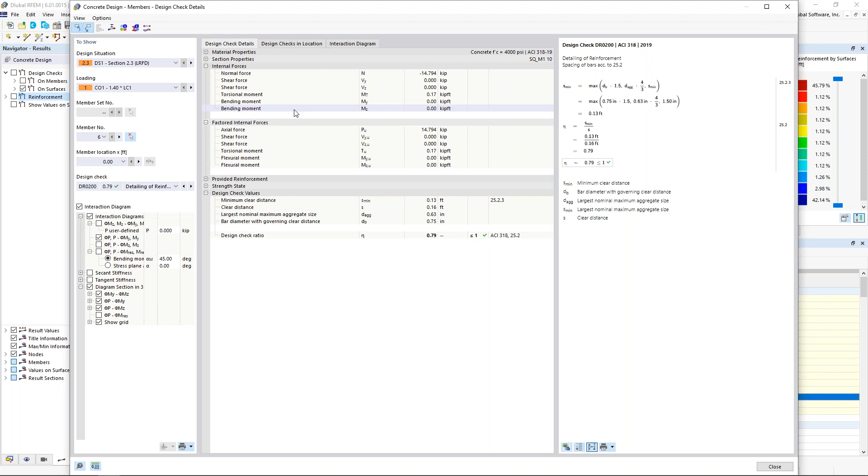Notice that when I click in here, we're shown exactly where that controlling internal force is for this particular column. I'm not going to spend too much time going over the results because we've already seen this with example 1, but with our columns, what might be interesting to us is this new feature here within RFEM 6 for our interaction diagram. So this was long awaited, and we're very happy to present this now because we will see the interaction diagram available to us with this new tab and the 3D view here.

So we can view all of the values within table format, but we can also see where exactly we land within this interaction diagram for this particular member at this X location. We can add this information to our printout report, so very powerful there as well.

And of course, we have our design check ratios, our reinforcement, that can all be shown graphically for the members that we covered in the first example. So the final thing to cover is just a quick few options with the printout report.

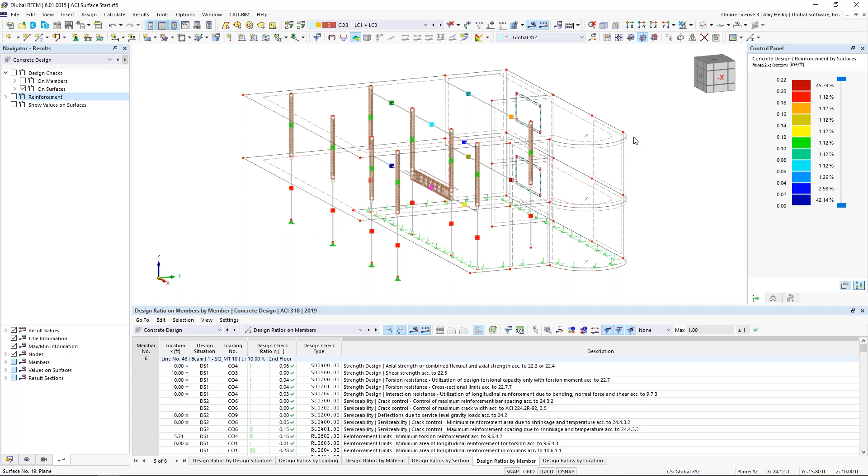So what I'll do is create a visibility here for my surface, and I want to hide these hidden objects in the background. I'm also going to adjust my view here to the reverse Z direction. For my reinforcement, I want to show all 4 of these options here for the required reinforcement in my printout report.

So the first thing I'll need to do is actually generate the printout report itself. Up here in our toolbar, we can choose New Printout Report, and we can see all of the various settings we can turn on and off within the model.

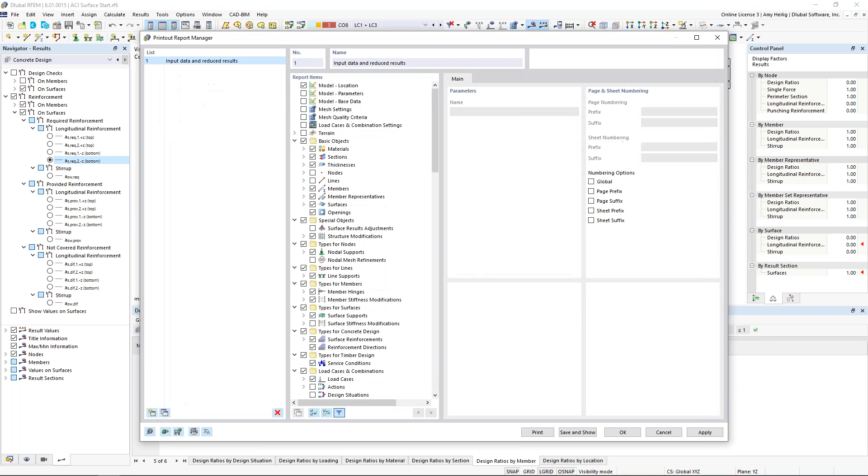Now we also have some saved templates here, so you can load one of those saved templates or create your own template. We'll go ahead and work with template number 1, input data and reduced results. So I click OK, I click OK once again, and that printout report is now created in the background.

For my graphics, I'm going to choose my drop-down option here to print the graphics to the printout report. And what we'll notice is that I can set this to the full page height, and I've set this to the window filling so that it is nice and zoomed in here.

And I don't want to just print this view here, but I want to take advantage of what's called the multi-print. So when I select this option, I now can visit this tab up here for my concrete add-on. Now all of the various options available to me here is exactly what we have available in RFEM that we covered.

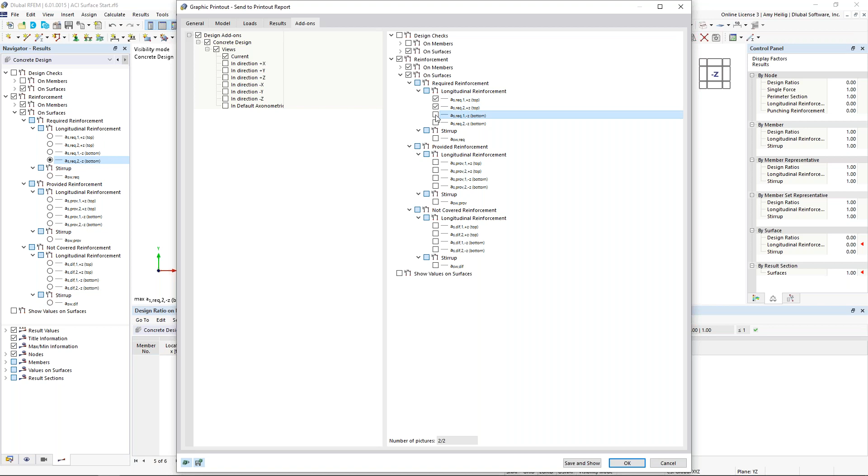So what I'd like to do is activate for my printout the required reinforcement in both directions for the top and the bottom. So I click OK, and then what I should see down in the lower left-hand corner is the progress bar that has now added that to the printout report.

So if I go back to my navigator here, I can find that printout report available to me here. I can double click on it, and it should go ahead and compile all of those results. We can see our progress bar here to open up the printout report in a separate application.

So we can see that application load, and I'm going to collapse our report navigator chapters just so it's a little less overwhelming here on the left-hand side. But this is going to show us, and I can zoom in here, all of the input data, including the results for our structure.

But down here at the bottom are those 4 pictures that I just printed off based on that multi-print option. Now what's really powerful is that if I make any changes to this model, the program will automatically update these pictures, so we don't need to go in and print them again.

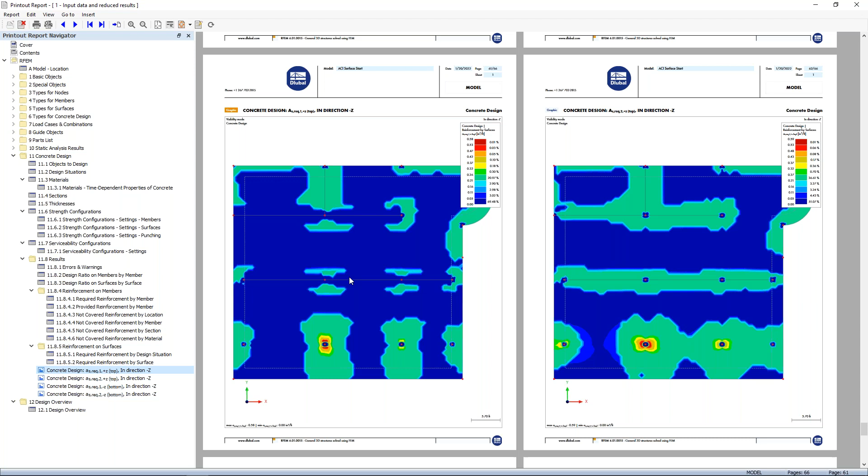So once these pictures have been defined, what I can do here is just drag this printout report to my other monitor, because we can work concurrently in the program at the same time.

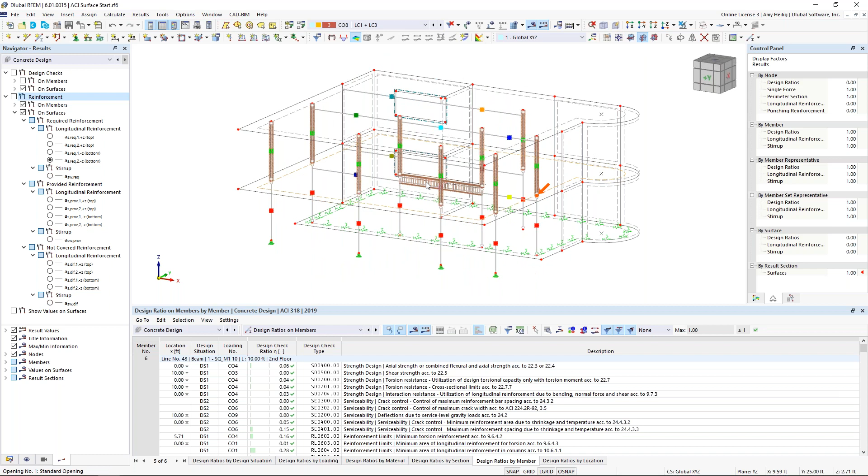So let me cancel out this visibility mode, and I'm going to go back to my results here, turn off my surface, and select only my rib member, and create a visibility by the selected objects. Additionally, I'm going to turn off that member reinforcement here, and we will choose our view in the Y direction. So just a simple wireframe view of that member.

Well, back under my results, I'm going to take a look at the design check ratios for this member. And I don't want the max, but rather I'm going to overlay here several of the design checks. And you can see again, these color codings will show me exactly which design check ratios I'm looking at.

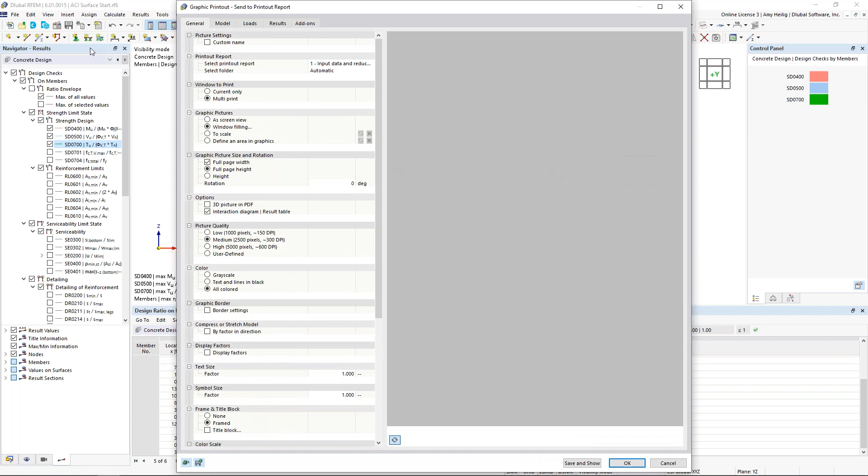So let us print this off to our printout report as well. I go up here to choose print graphics to printout report. And this time though, we want to view the current view only, and I want to also modify this to not the full page height, but we'll choose 50% of the height.

So once I have these settings correct, I click OK. And what I'll do is drag this printout report over to the monitor so that you all can see it too. And we now have this picture automatically added to the printout report.

Now we also can right click on any one of these folders to create a child folder. So perhaps we want to rename this to Surface Graphics for a little bit better organization. I can right click under Concrete Design, create child folder again. We'll call this Member Graphics.

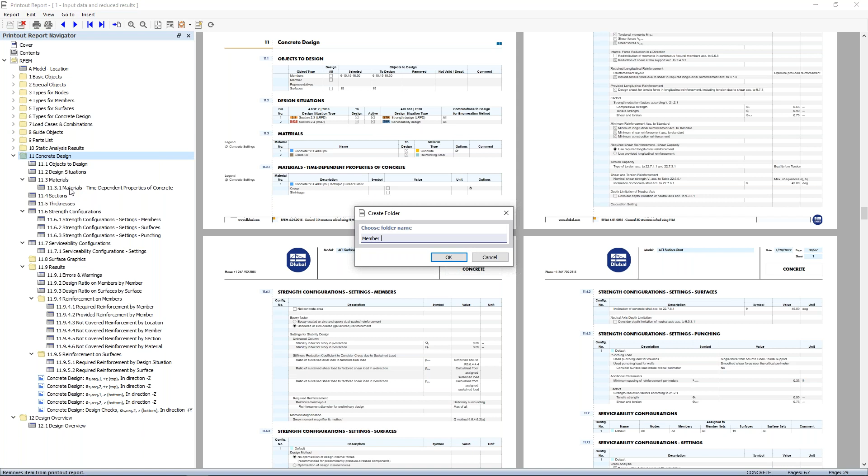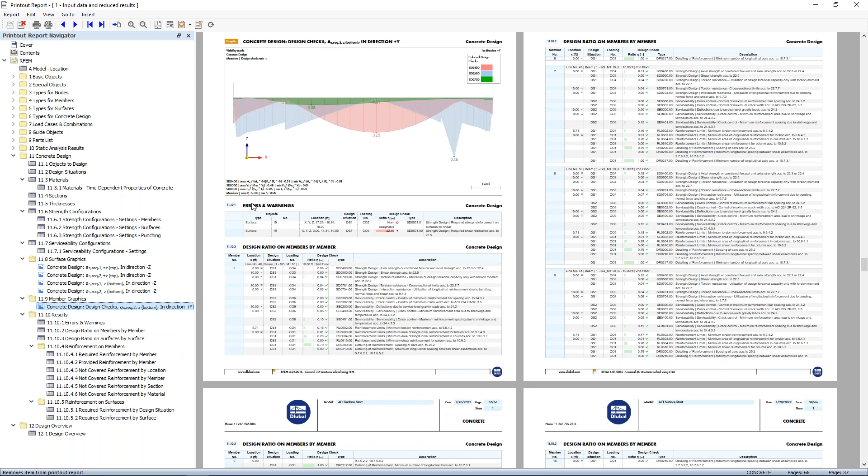I click OK. And I can use my Shift key to select all 4 of my surface options here. I can drag and drop them into that new child folder, and the report will automatically update. For that rib picture, I can drag and drop that one into Member Graphics, and we can see here it's now added to that portion of the printout report.

All of this information you can edit, including the logo, the cover page. We can modify this cover picture. Once you have the information set the way you like it, definitely save it as a template, and you can use that for any future models within RFEM. So extremely powerful printout report. We did a lot of great changes with this new version. So certainly take a look at this.

Okay, so we are ending the hour today, so I'm going to go back to the webinar. One thing I just quickly wanted to mention before concluding the presentation is just some upcoming developments. So when we're looking at the ACI, I had already mentioned that punching shear should be ready in the next several weeks. So that will be something that we can look forward to.

Chapter 18 for seismic design. We currently have the reinforcement detailing available to us, but we're going to continue expanding on these topics, including information like strong column, weak beam. The 2014 standard should be implemented relatively soon as well. RFEM 6 was completely rewritten in an updated programming language. So we initially started off with the most recent standard, the 2019. We'll go ahead and add in the older version as well.

And nonlinear concrete design is also in development. So this can actually consider the true cracked cross-sectional properties for members and surfaces for that nonlinear design. CSA A23.3, everything that you saw today is also available for the Canadian standards. It's an identical workflow. We're just doing the design according to the CSA. The punching shear should also be available soon according to the Canadian standards, and nonlinear concrete design as well.

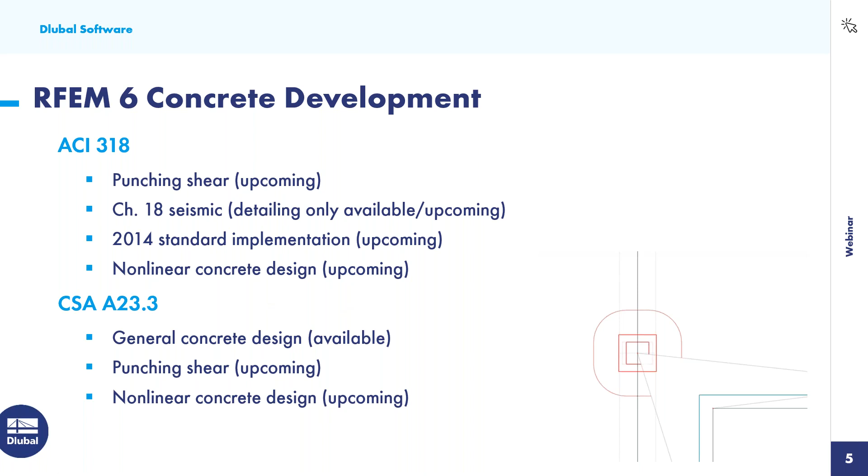So these are just some developments in the near future. Of course, we have longer term developments as well that are just a little bit further off. So I know that was quite a bit of information.